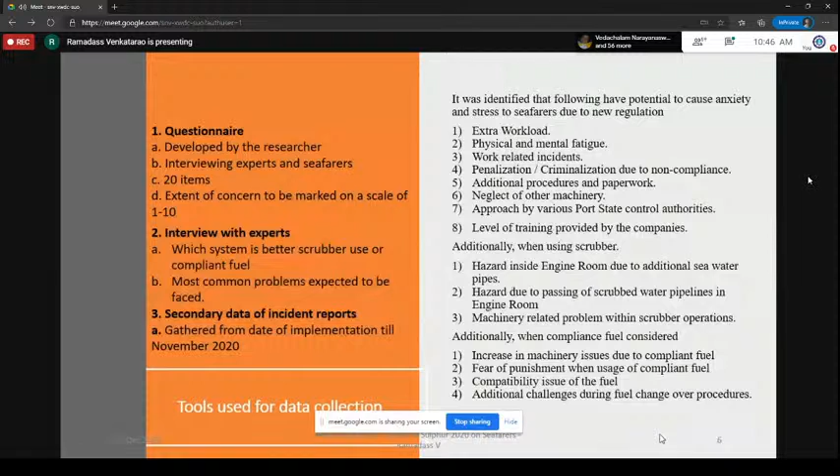Questions were made with a lot of concerns that had been identified, and there were about 11 concerns on the use of scrubbers and 12 questions on the use of alternate fuel. A statistical analysis was done, with descriptive mean, SD, and rank ordering.

The scrubber-related issues scored a high mean of 6.78, and compliant fuel use got a mean of 5.14. The mean scores above 6.6 were highlighted in the next table, which I am presenting on the next slide.

The significance level between the groups was also analyzed. If you see the concerns that have been listed, this is common for both scrubber as well as compliant fuel. Mostly the 6.6 and above score is seen only on the scrubber usage, and I could see at least more than 4 or 5 are identified by all categories, in many of these concerns that have been marked.

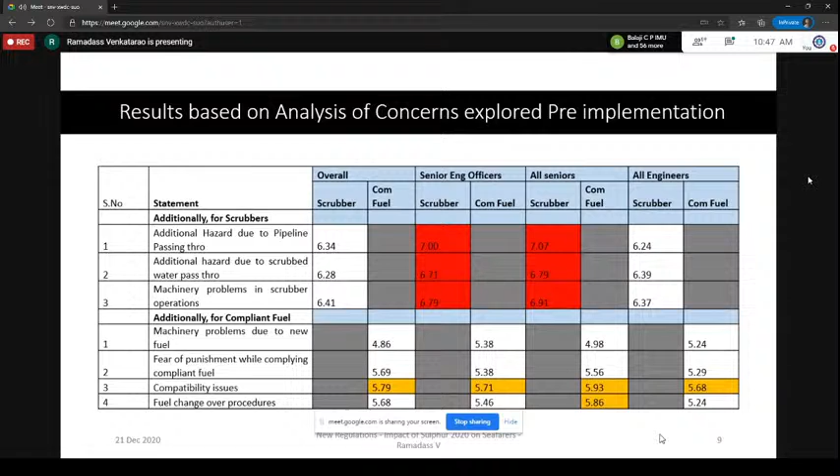You can see that the first set of points are those which would be happening only on the scrubber, where everything was high across the team, and the next set of 4 questions were for the compliant fuel, which were relatively lesser compared to the scrubbers.

From 1st January 2020 until 15th November, out of 221 vessels across 3 companies, we identified 59 ships fitted with scrubbers and 162 ships using compliant fuel. A total of 45 issues were reported, of which 34 were scrubber related and 11 were compliant fuel related.

The malfunction of the scrubber equipment happened to be 21 numbers, and the leakage from the scrubbed water system was 6. Leakage from the seawater system was 4. The possible penalization is 1, and the work-related incident was 2.

In fact, I must tell you that there was something which was not identified in the initial risk assessment that cropped in - especially there was a minor fire in the yard when the scrubber installation was being made, and even that I have made it a concern.

Of the 162 vessels where compliant fuels were used, 11 incidents were reported, of which 3 were pertaining to fuel compatibility, 6 were issues on machinery, and 2 were work-related incidences. The cleaning of the tanks with the high sulfur fuel posed a big challenge, as the ship's crew were not familiar with handling such a large quantity of sludge and discharging it.

In fact, in an incident while landing the sludge using some specific containment boxes, a minor spill also occurred on the jetty. So this is also one of the concerns that we found out.

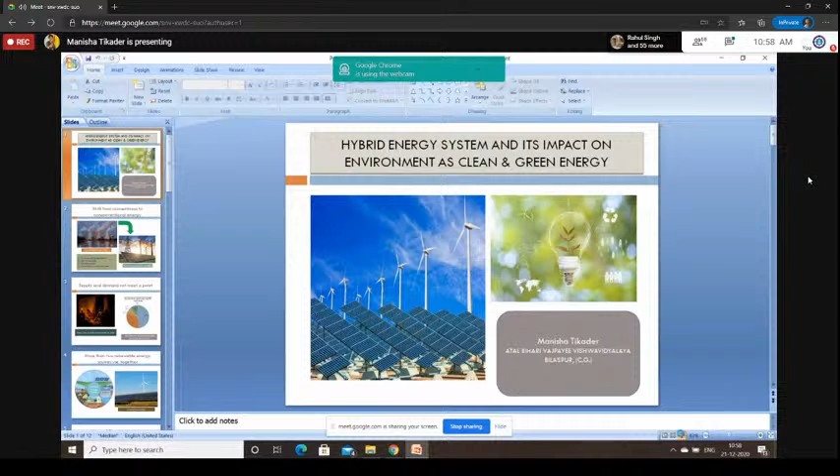Good morning to all. This is Manisha Tikader from Kolkata. I'm a research scholar from Atal Bihari Vajpayee University, Bilaspur, Chhattisgarh. This is my first paper actually, so I am very nervous. My topic is hybrid energy system and its impact on environment as clean and green energy.

This is my first slide. The whole world has been rapidly shifting to renewable energy over the last few years due to environmental degradation. A lot of heat is injected into the biosphere from thermal power plants through exhaust gases and wastewater. The major problem is the effect of discharge of large quantities of heated wastewater into natural water basins. Hot water and greenhouse gases raise the temperature and disturb the natural ecological balance and human health. The plan is to have at least 175,000 megawatts of installed renewable energy capacity by 2022.

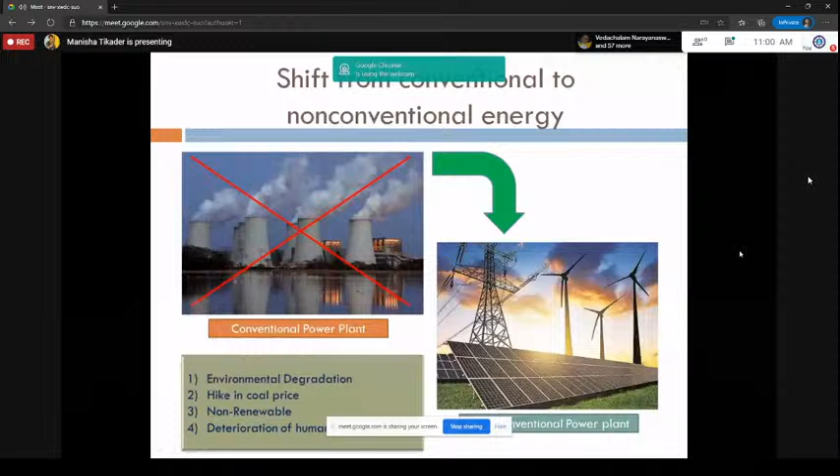But till now, millions of Indians are not connected to the grid system. Some parts of India remain dark at night. According to the data of the Central Electricity Authority, in the year 2019 India generated 126,759.09 megawatts of non-conventional energy. Some of the world's biggest solar and wind power projects are now being built in India.

At the same time, India has a very high population, so it has to optimize land usage. Therefore, we plan a system that uses both solar and wind power in a single location. India's first large-scale solar-wind hybrid energy project has been built in Karnataka at Kavithal, Raichur district. Hybrid power projects will end up providing a measured and optimized way to generate renewable energy, which helps make our planet green and clean.

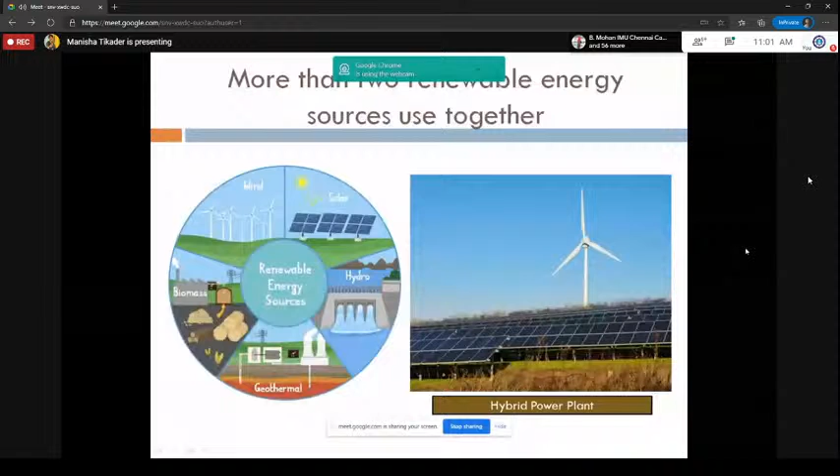Now, the question is, what is a hybrid energy system? It is when two or more than two renewable energy sources are used together to provide increased system efficiency as well as balancing energy supply and environment. The main objectives to switch over from conventional to non-conventional hybrid power systems are: one, making the Earth's environment suitable for human habitat to meet the increasing demand of power; optimum utilization of land; and improving the economy.

The word solar means the sun, and solar energy means the energy of the sun. Each and every day, the Earth receives a huge amount of energy directly from the sun. Using a specific method, we can utilize solar energy. Solar energy reaches the Earth in the form of sunlight. On a sunny day, at noon, Earth receives 1 kilowatt per meter square of energy.

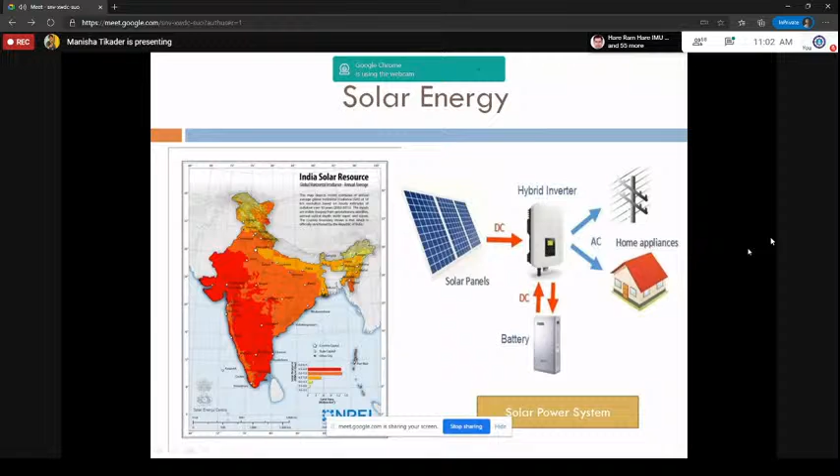India has a huge potential for solar power generation. In this map, we can see the western part of India receives a good amount of solar radiation. India's goal is to produce 100 gigawatts of solar electricity in the year 2022. A solar panel works by allowing photons to free electrons from the atoms, generating a flow of electricity.

We first noticed that King Hammurabi set up windmills to improve irrigation in agriculture in the 17th century of Babylonian civilization. Wind power mills produce electricity with the help of wind to provide mechanical power through wind turbines to turn electric generators. The main parts of the wind turbines are rotor blade, brake, gearbox, controller, etc.

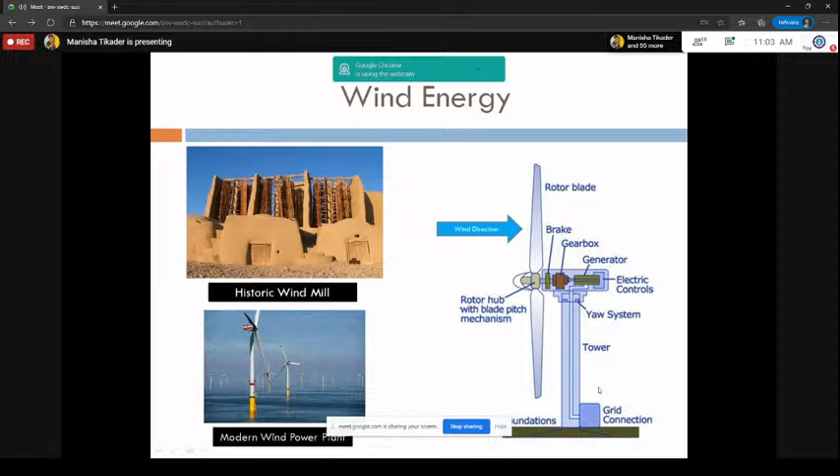The most important component used in the hybrid power system is the inverter. The role of the hybrid inverter is very important to convert direct current DC into alternating current AC. There are different types of modes of hybrid inverter.

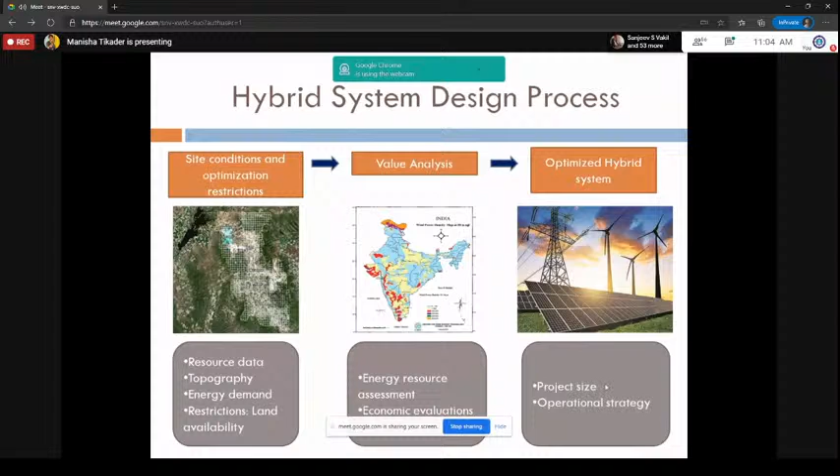Now, the advantages of the hybrid energy system. Some hybrid systems typically include both, which can simultaneously improve the quality and availability of power. There are limited operations and low maintenance cost. The hybrid energy system does not use any fossil fuel. It is exclusively a renewable energy system.

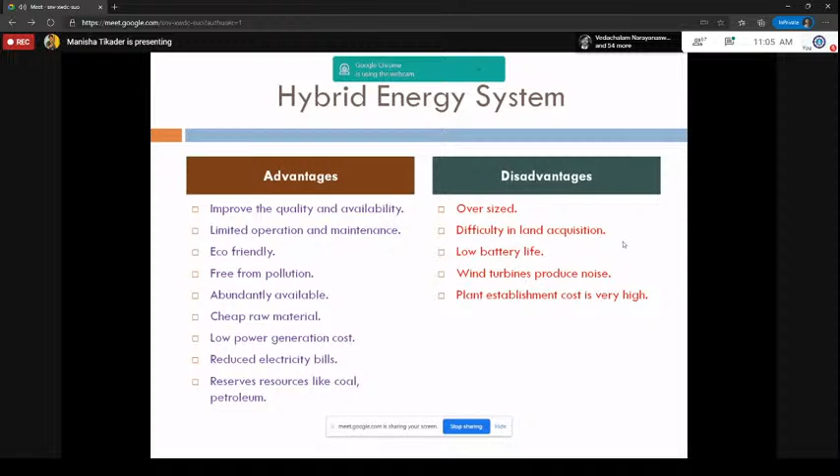Disadvantages are: in most cases the hybrid energy system is oversized. 1.3 billion population in India have to install this kind of hybrid power system. It is very difficult to find the site because land acquisition is a big problem in India. Still now, 90% of energy is supplied by conventional sources. So there are a number of environmental issues: emission of carbon dioxide, sulfur dioxide, nitrogen dioxide, and particulate matter causes adverse effects on the environment and causes climate change.

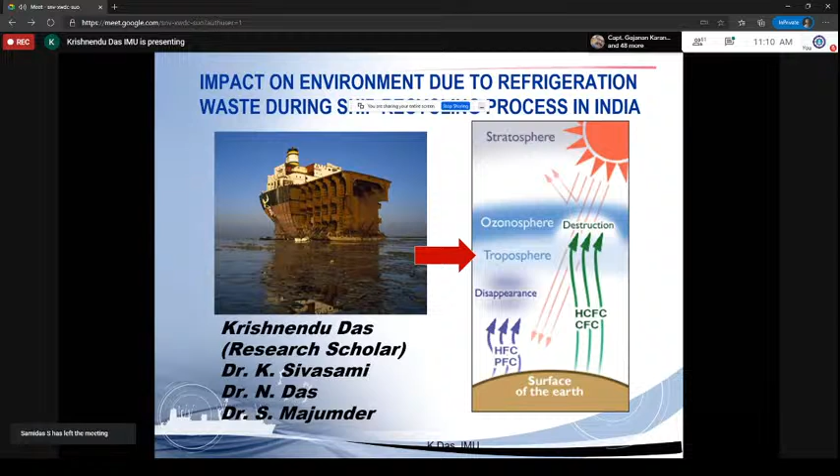So what actually happens when you go for ship breaking? If I talk about the concern in India, it is one of the biggest industries because of the ship recycling process. There are so many small and big ship recycling industries throughout the coast of India, near about 150, whether big or small. When you look at ship breaking industries, first you will find Alang in Gujarat, then Maharashtra, meaning Mumbai, Dharukhana, then Calcutta, Khidirpur, then Andhra Pradesh, Vedaravu, near Kakinada, Kupala, so many ship breaking industries are there. In total, the world's ship breaking industry, around 33% or more happens in India. This industry has a chain relation with other industries for recycling steel and other commodities coming out after the breaking process.

So here, in this magazine, you can find so many things, where in India you can find out around 33% of the scrapping happening. If you look at this report, in 2015 there were 275 ships, 2016, 249 like this, and in 2020, up to the third quarter, 129 ships already in process and done, even with COVID-19 situations. Then we can see what figures are going on in the ship recycling process and what the effect actually is.

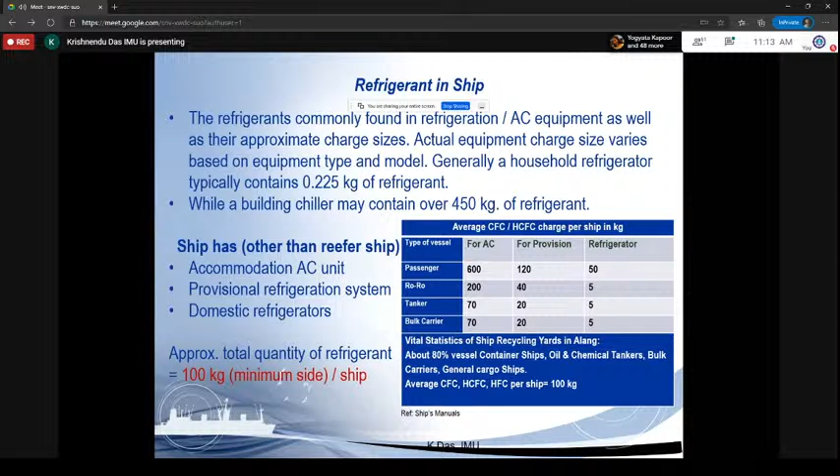So if I go for the average, considering the lower side, every ship has at least 100 kg of refrigerant used, on ships that are 25, 30, or 35 years old, where as per the Montreal Protocol convention, we know that at that time HCFC and CFC refrigerants were used, mainly R12 and R22. So now, with the Montreal Protocol, you can find that it phases out all these, sorry, reduces these. So with refrigerant regulation plus the Montreal Protocol, now we are moving toward higher, more environment-friendly refrigerants.

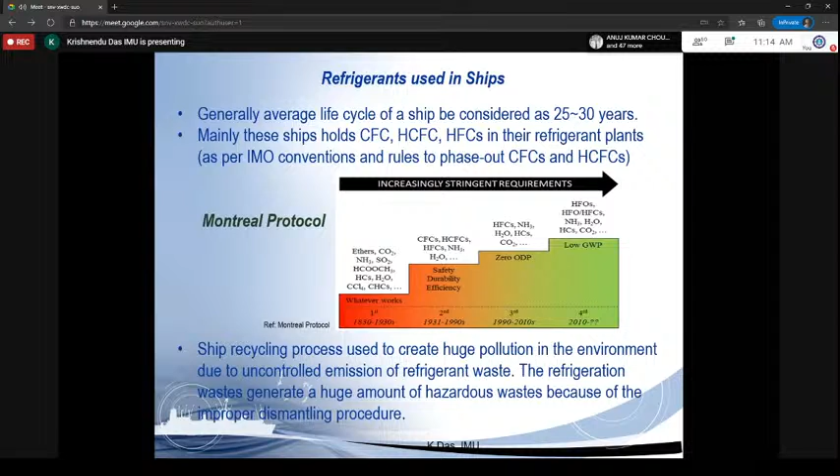If you go back to 1931 through 1990, you will find CFC and HCFC were used, which are fluorine and chlorine based. So what is the pollution actually coming from this? You will find out.

India entered the Hong Kong Convention in November 2020. The Hong Kong Convention says how you categorically control and audit the recycling process and all the commodities coming out.

Which go for environmental effects. So if I go for that, you will find out what is actually happening. There is no collection record of refrigerant from the ships, no release record of ships when they are breaking these refrigerant units, pipelines, all these. No record of in-house disposal using a special type of incinerator.

Remember, R12 and R22 cannot be used anymore. But somewhere we have gone through some shipyards and found records that refrigerant has been recovered. But after that, what happens to the refrigerant? Because it cannot be used, and frankly speaking, there is no such disposal facility for any shipyard in India.

Then that system is open loop. In the Hong Kong Convention, nothing is mentioned about what to do in this open loop system. They simply release refrigerant directly to the environment, whether it is breaking 50%, 20%, 25%, or even 10% release of refrigerant, because we are thinking when they are breaking these, the people are not trained.

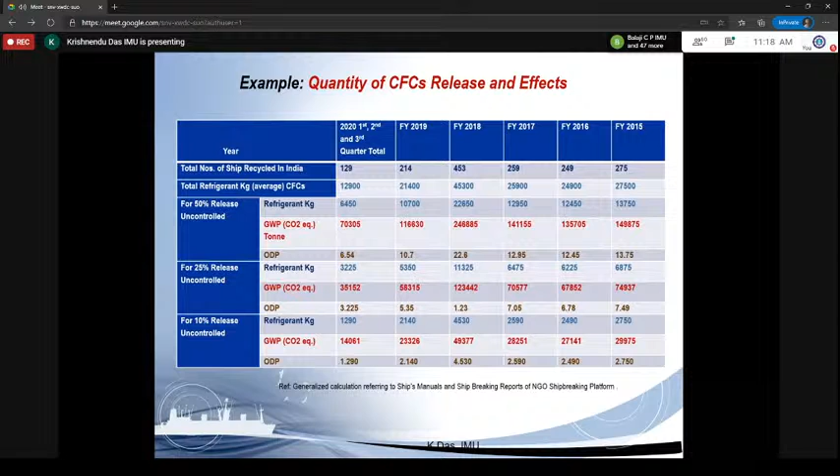This is our scenario. I am not going for the back side. The calculation is very simple, and this calculation is on the lower side. I am not considering any passenger ship here. So this is the scenario of CFC released, which is coming up every year from the recycling process in India.

Environmental effect, I will not discuss too much. Chlorine, chlorofluorocarbon - chlorine is there. When these CFCs and HCFCs are at the surface level, there is no effect. But when it goes to the stratosphere, then it has a bad effect on the ozone layer. This chlorine affects the ozone, breaks the ozone, and there is a hole. That is the idea of this ozone breaking process, which everybody knows.

So just think about it - one chlorine molecule breaks about 100,000 ozone molecules, and that is happening every year in our ship breaking industry. That calculation already given is the minimum side. What is the effect? All of us know very easily: sunburn, skin cancer, cataracts, and other skin and eye damage - obviously direct and indirect effects, aimed towards the smiling globe.

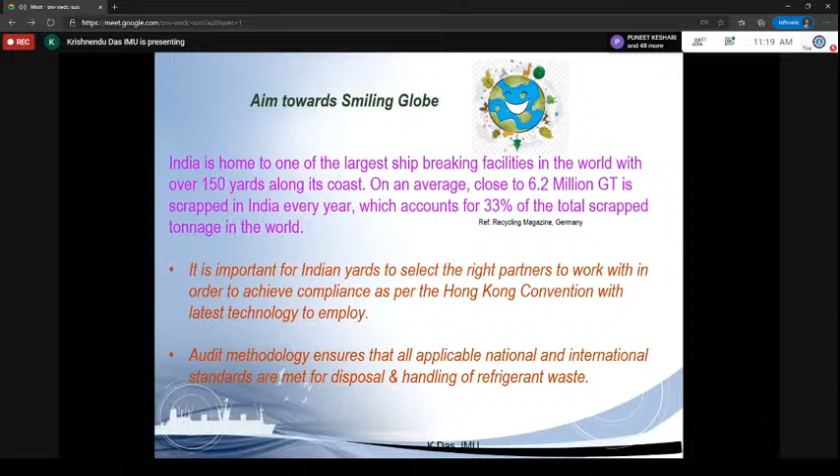So I have already told you about so many ship recycling yards, small and big, along our coast, which is 33% of the total scrapped tonnage. It is important for India to select the right partner to work with in this order. That means we have to work properly with the industry where our CFC and HCFC disposal unit must be in cooperation. Audit, at every point we have to do audit, and on the next page I'll explain what to do for our research and the handling process.

Disposal procedure — now this is where our convention does not mention the detailed disposal procedure for about 20-year-old ships which used CFC and HCFC. No risk assessment related, and then refrigerant goes to a reclaimer — but what is the use after that? That is the open question: is it open loop or closed loop? Because if it is closed loop, it has to be destroyed or disposed of properly.

An environment awareness training program for workers and staff must be required. That is also very lacking, as we saw during our visit. We have seen that nobody knows about what the actual effect is — even some management level officers, I'm not blaming them, because this is the actual fact.

They don't bother about it either. Even for the convention, they are just doing a paper convention — that is only for the audit, showing how much they are collecting. What is actually there for disposal — no records, nothing, no process is there.

Training is required to have a certified person for monitoring, record keeping, and disposal of refrigerant from ship recycling — even if it is received by the industry or source industry, how it is used, whether it is disposed of properly or just used for other machinery. There is no record, nothing is there, so the loop is still open. That means all this refrigerant, directly or indirectly, is released to the environment.

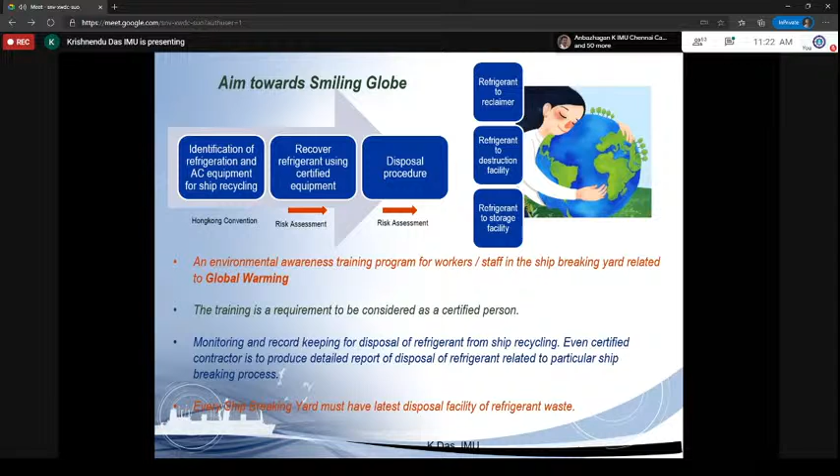There are three very effective processes for disposal: incinerator or high temperature incinerator, or a plasma plant with an arc system where a 10,000 degree temperature is maintained, breaking down the CFCs and HCFCs, separating all the molecules to be used as raw material so they are not released into the atmosphere. That too should be installed everywhere.

That is my target, and we have to do this work all together. This is my reference — it is hard work, but we have to work from the heart. That is my presentation and research topic for today.

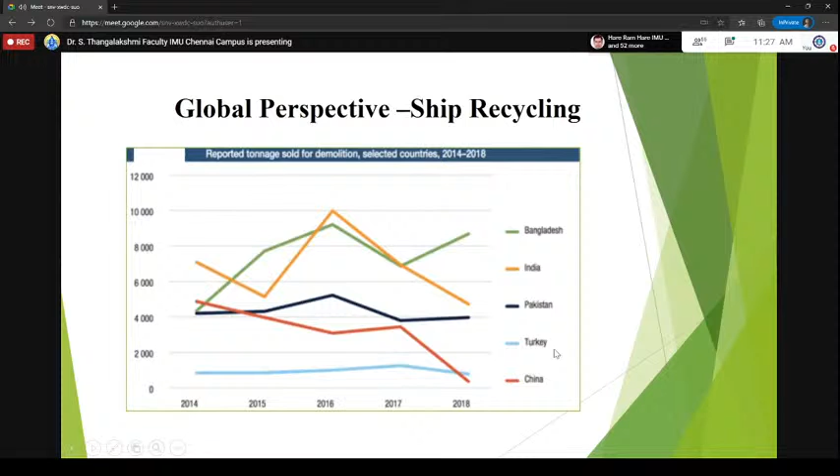Next slide, please. So these are the major legal frameworks: the Basel Convention on the Control of Transboundary Movements of Hazardous Waste and their Disposal of 1989, the ILO guidelines which specify living and working conditions in the ship recycling industries, the Hong Kong International Convention for the Safe and Environmentally Sound Recycling of Ships 2009, and the EU SRR, that is European Union Ship Recycling Regulations, enacted in 2013.

So the entry criteria for the Hong Kong Convention requires 3 separate criteria. The first is ratification by 15 states, the second is that member states must represent 40% of the world merchant shipping tonnage by gross tonnage, and the third is that the combined maximum annual ship recycling volume should not be less than 3% of the combined gross tonnage.

At present, the status is that the first criteria has already been met. The second and third criteria are yet to be met.

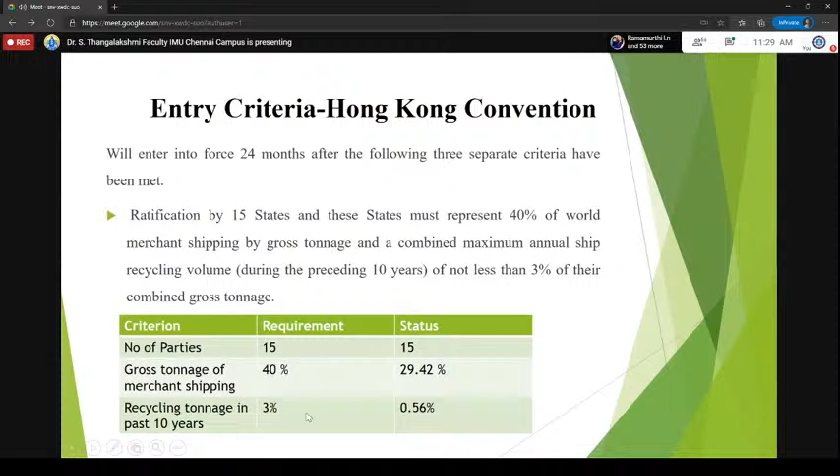So the timeline of EUSRR is that by 31st December 2018, all new ships of 500 GT and above flying the flag of EU and EEA shall carry an inventory of hazardous materials on board. And ships which are to be recycled during that period must have a ready-for-recycling certificate, and must be recycled only in EU yards, from the list of EU ship recycling yards.

The next mandatory timeline, which is quite close to us, is 31st December 2020. Ships flying the flag of EU and EEA, and third-party ships visiting EU and EEA ports and anchorages, shall have a valid and certified IHM on board. At present, many of the flags are issuing SOC in this regard.

Next slide. So from the Indian perspective, India has acceded to the Hong Kong Convention and is home to the largest shipbreaking facilities in the world, over 200 yards along its coast. Along the Alang-Sosiya Belt, which accounts for nearly 95% of India's ship recycling, about 6.2 million GT is scrapped in India every year, which accounts for about 33% of the total scrap tonnage in the world.

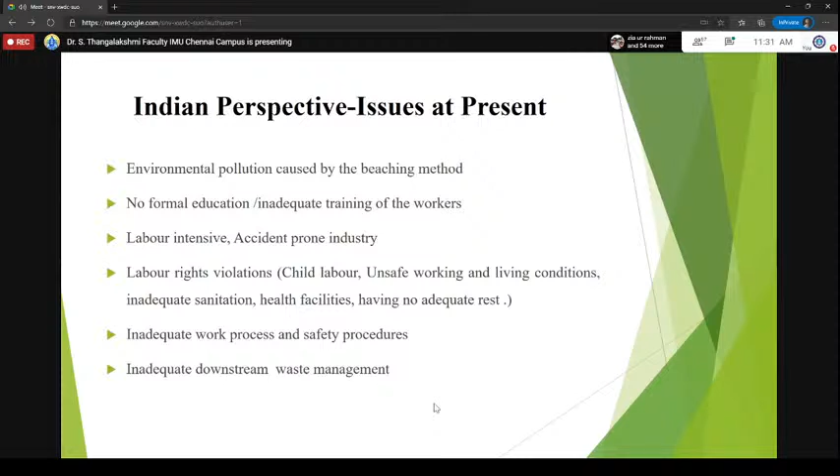Next slide, please. So the issues at present in the Indian shipyards are the environmental pollution caused by the beaching method, which is not acceptable for EU SRR, and no formal education or adequate training for the workers, leading to labor rights violations. It's a labor-intensive industry with inadequate work processes and safety procedures, and inadequate downstream waste management, which is also a point of concern as far as EU SRR is concerned.

So presently, about 43 yards are in the European list of approved yards, including 34 facilities located in 12 EU member states and in Norway, 8 facilities in Turkey, and 1 facility in the United States of America. It's quite sad to note, and a point of concern, that not even a single yard from India has qualified to be in the EU approved ship recycling yard list. So that is a matter of concern as of now.

So the mounting pressure from NGOs and financial institutions is forcing EU ship owners to follow a responsible approach towards ship recycling. The European Union Ship Recycling Regulation mandates that EU flagged ships must be recycled only in the EU list of approved yards. Right now, many European ship owners are circumventing the regulations and sending vessels to India for demolition by choosing flags of convenience. The EU has noticed this and is trying to provide incentive schemes for ship owners who opt to recycle at EU approved yards. If the Hong Kong Convention doesn't come into force immediately, this could increase acceptance of EU SRR by ship owners, meaning a huge loss of business opportunity for India, which recycles almost 40% of world ship tonnage.

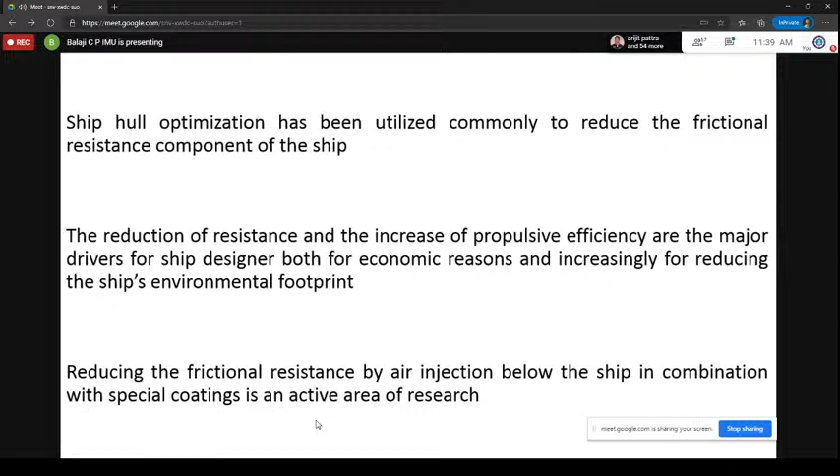This air lubrication method is a technology to reduce hull friction resistance by sending air to the bottom of the hull, which creates a layer of air bubbles between the hull and the seawater. There is a formation of air bubbles between the hull and the seawater. These air bubbles will reduce the frictional resistance of the hull.

This paper reviews various techniques by which air bubbles are created and sent below the hull. They are air micro bubbles, air cavity, and air film or layer formation. First, air bubbles or micro bubbles; second, air cavity; and third, air film layer formation.

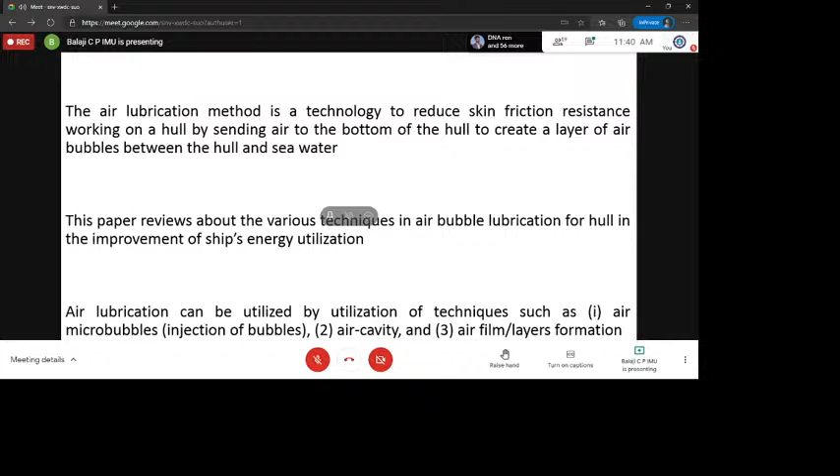In air micro bubbles, we have two methods. Presently, they are doing research on small vessels, not on big vessels.

In air micro bubbles, we have creating micro bubbles using a hydrofoil air pump. By this method, micro bubbles are generated using a bubble generator, that is the hydrofoil air pump, and they are sent underneath the hull to form a layer which will reduce the frictional resistance. But in this method, there is a need for production energy required for producing the air bubbles. We require conventional bubble generators which require energy.

So next, they came out with another method which, without using energy or bubble generators, can produce the same micro bubbles, smaller bubbles. This is called winged air induction pipe technology. This technology has an angled hydrofoil with an air introducer, with a winged hydrofoil.

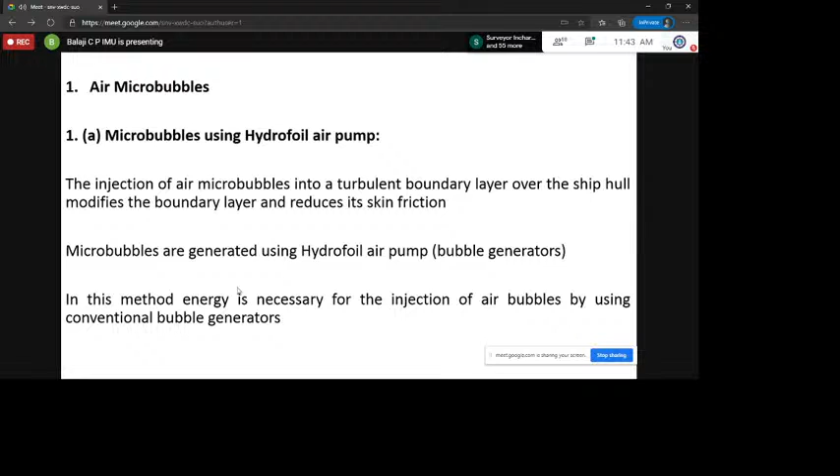Compared to the previous hydrofoil air pump method, this micro bubble size is almost 1/100th the size. They have found that once these air bubbles are ejected, the size of the micro bubbles doesn't change. That is one important thing.

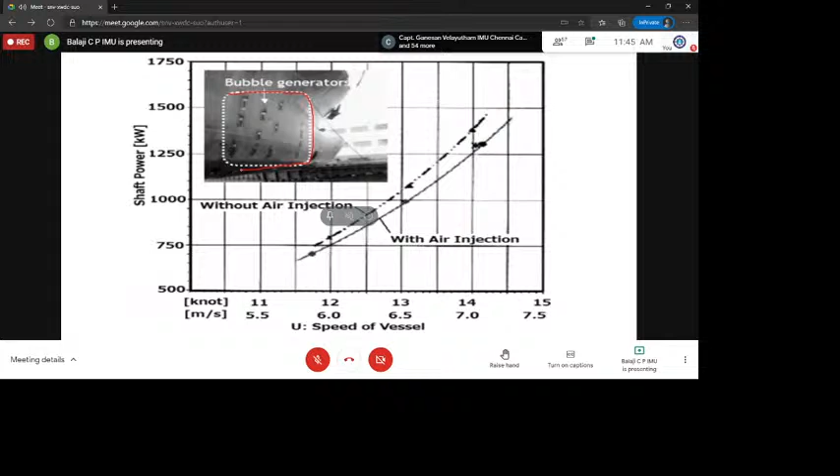This is about the bubble generator, or winged air induction pipe technology method. There is a graph drawn with shaft power on the y-axis and speed of the vessel on the x-axis. They have done experiments increasing the speed and measuring the shaft power required, one with air injection and one without fitting of air injection.

We can see that with air injection, more speed is achieved with less power. In case of no air injection, the same ship used for the experiment before requires more shaft power for more speed. That means more fuel, more fuel burned means more cost as well as more emissions and pollution to the environment.

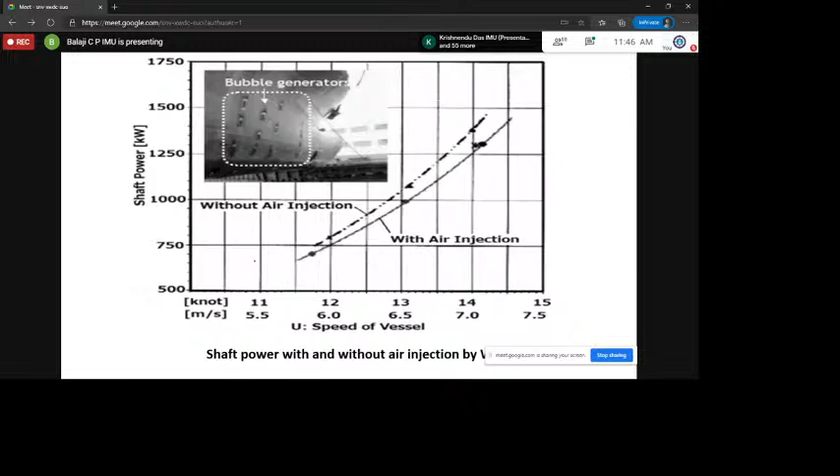This is the second method, about air cavity. In this, air is discharged from the blow-off portion mounted on the bottom of the hull, and this air discharge converts into air bubbles due to the tearing forces of the surrounding flows.

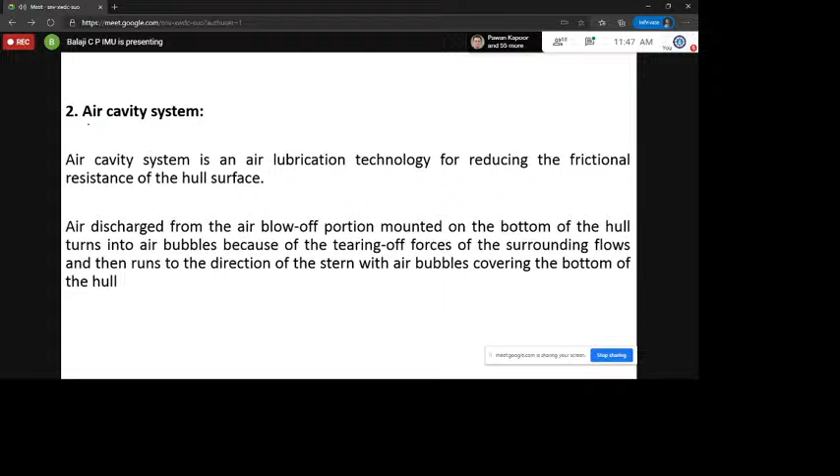All these experimental things have been done on small ships, and this will reduce the frictional resistance. But when doing the experiment, they found there is a difficulty in maintaining the stability of the air film formed.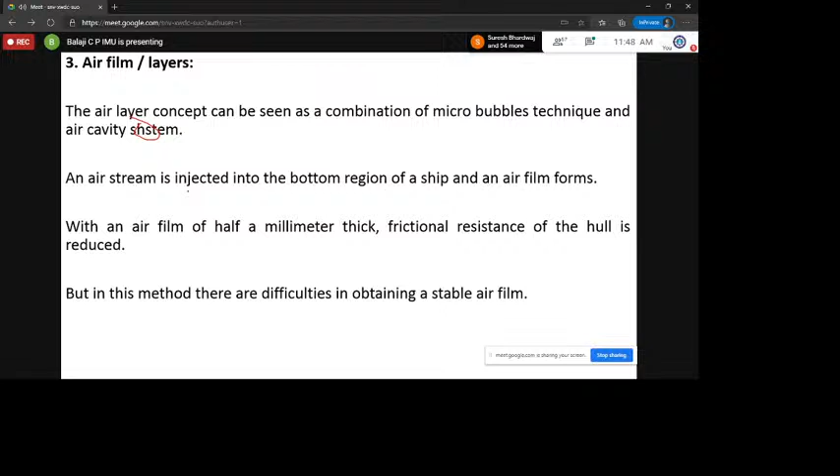So the conclusion is we have to go further and do some research on these types of things, which will add to the reduction of frictional resistance of the hull, thereby reducing fuel consumption.

Thank you. Thank you, Mr. Balaji. Thank you so much. Any questions on this? Yes, sir, there are questions.

Which technology has the potential to be implemented in the near future? What hinders its implementation in real time now?

Is the question clear, Mr. Balaji? Yes, I got it.

Actually, the winged air induction pipe method can be used because it doesn't use any energy for production, but the ship's speed is very important now, and where to fix all these things, because there is the ballast condition and the loaded condition. The difference between ballast condition and loaded condition changes the ship's water line, and then another factor is the speed of the ship.

Nowadays, due to slow steaming, we are going to reduce speed. So first they started with normal speeds, and now slow speed has also been introduced. So there is an area of space for research in these things.

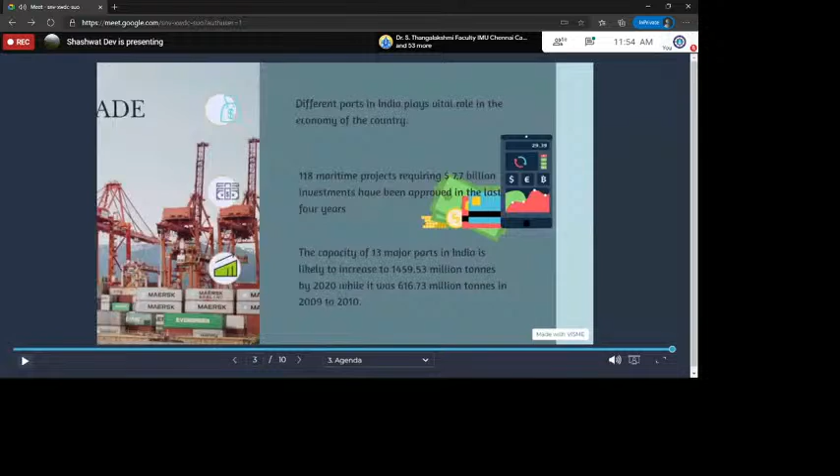Traffic management in ports help in improving the efficiency of port security. The global traffic at port is increasing every year. Countries like China, Singapore, South Korea, United States, etc. are among the top world container ports. Handling millions of TEU traffic per year also increases the amount of global money that is at stake.

Based on a study conducted by the Allianz in 2018, 75 to 96% of maritime related accidents are caused due to human error, such as inadequate training, fatigue, negligence, etc. These oversights have cost around $1.6 billion in losses from 2011 to 2018.

Computerized port management can reduce these losses to a great degree. Automation of activities that are otherwise handled manually can increase the efficiency and reduce risk to the port. The ever-growing traffic needs to be managed by an ever-evolving port management system.

When we are looking into the finances that are at stake for any port-related activities, we should also consider the losses that companies or respective stakeholder would incur in case of an attack or a calamity.

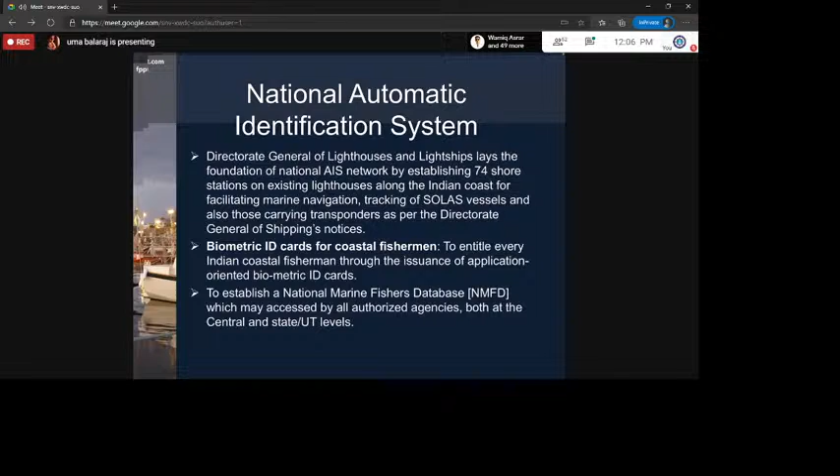Then coming to the National Automatic Identification System, we have the Directorate General of Lighthouses and Lightships laying the foundation of the National AIS network by establishing 74 stations on existing lighthouses along the Indian coast. We also have tracking of SOLAS vessels carrying transponders as per the Directorate General of Shipping notice.

And we have biometric cards for coastal fishermen to establish a national marine fishers database, which can be accessed by authorized agencies at both central and state union levels.

Coming to the Coastal Surveillance Network, it has been set up by the Indian Coast Guard comprising a sequence of static sensors having radars, automatic identification systems, day and night cameras, and met sensors at 46 locations along the coastline and islands.

The objective of vessel traffic services is achieved by integrating a variety of sensors like radar receivers, GPS, direction GPS, hydrological and meteorological sensors, which give an overall geographical picture to reinforce maritime domain awareness. The intention of the Coastal Surveillance Scheme is to strengthen the infrastructure of patrolling and surveillance of shallow areas across the coastal region.

And we have RFID tags, which offer visibility of real-time cargo movement. We can track a cargo container vessel, whether it is berthed, in anchorage, or whether the container has moved to the CFS. We can check it very easily.

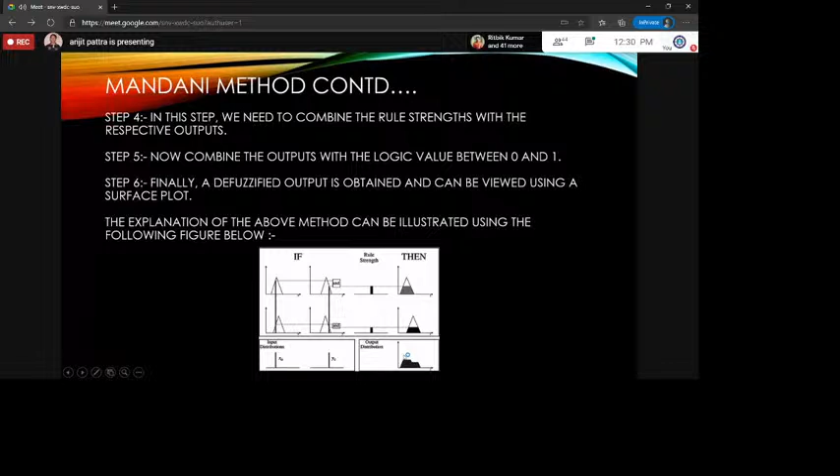So the fuzzy controller we are considering uses the same function as before, with the help of the PI integral controller. Now this fuzzy logic controller has as input the error input, which is the input minus the feedback, and the other one is the derivative of the error. Since we are using a multiplexer here, it is actually performing the summing purpose, so we can say it is a modified PI controller.

So we have considered here the block diagram for this: first is the error input, second is the derivative of the error, and this is the controller, and hence it leads to the excitation.

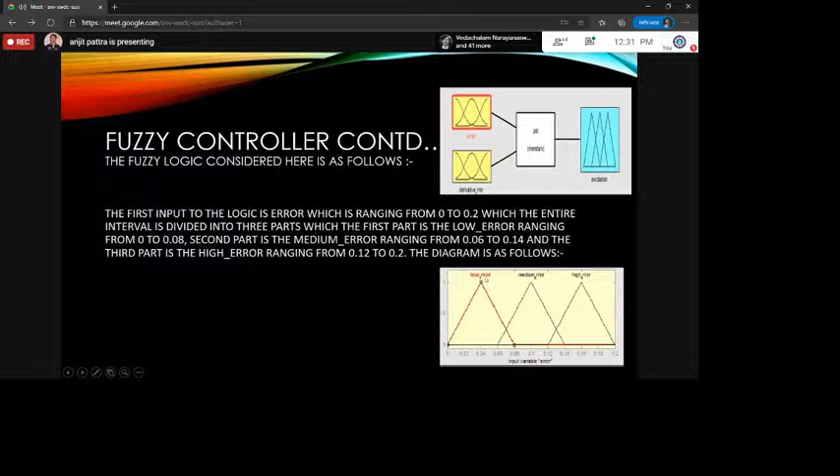For the best response, we have considered the input in between logic 0 to 0.2, divided into low error, medium error, and high error respectively. Similarly, the derivative of the error has been divided into 3 parts ranging from logic 0 to 0.8. Similarly, the excitation has also been divided into low, medium, and high, also ranging from 0 to 0.8. These values are obtained after performing various responses, and we obtain the base feedback for these values.

Now we have considered this rule strength where it is seen that the excitation is following the derivative of the error input. After performing all this, we obtain this type of surface plot, and if we see the output response, it has been seen that the overshoot is reduced and it steadily reaches steady state with less delay time, and hence the transient response is reduced, reaching its steady state within a very short interval of time.

Moving on to the conclusion, this fuzzy logic controller can very much replace the normal controllers used today, like the PID, PI, or PD controllers, as it helps reach the steady state with less transient time and less delay time, and it can be a good replacement and can be used in determining the dynamic response of a system. Thank you.

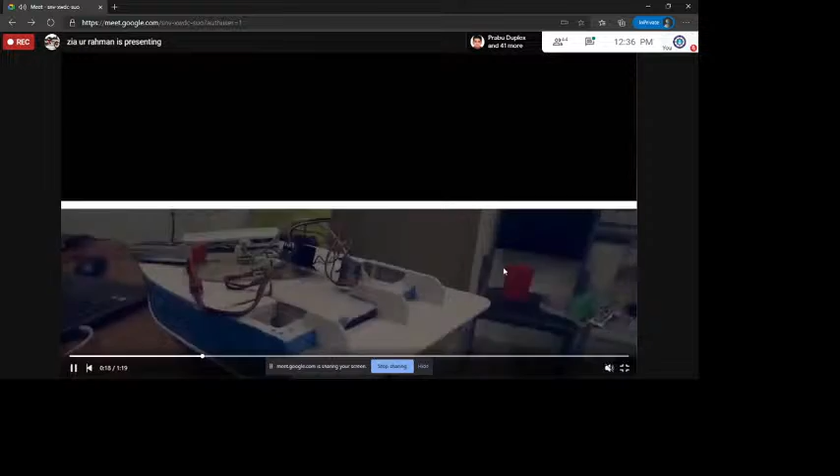We have implemented it on a twin screw boat using the ESP32 module. It is a Wi-Fi connectivity module that acts as an access point. Initially, when we configure it, it connects to the Wi-Fi and gives us the ability to talk to the device over the internet, giving us the ability to exercise control from almost anywhere in the world just by connecting to an internet connection.

Here we can see the manual control using a laptop interface. We have also implemented it using Google Assistant, providing voice control ability. Here we see ahead, astern, port, and starboard actions being carried out at maximum RPM. The left side of the computer screen is the RPM slider. We have implemented it using the Adafruit IO platform, a cloud database platform available for IoT implementation, which gives us speed and direction control.

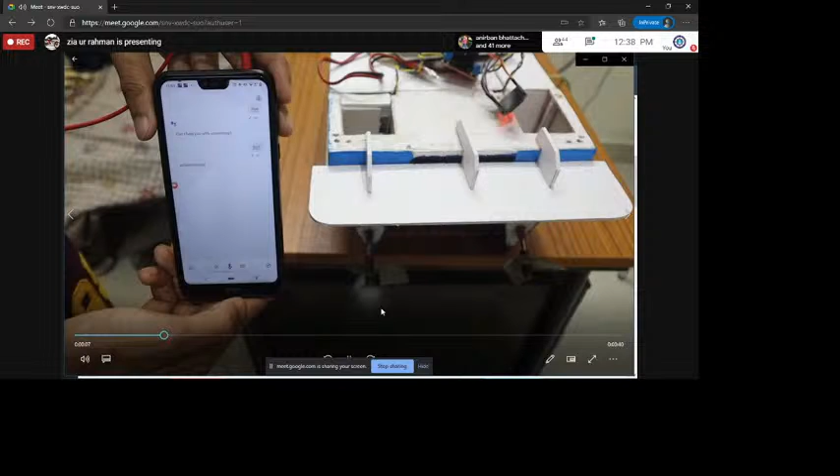Now I would like to present the video demonstrating the voice control. Here we see the voice command being given to Google Assistant, and the response time is roughly around a couple of seconds at times, but most of the time it is quite fast once the AI gets trained properly for receiving specific commands. It also has voice recognition so that other voice interferences are eliminated, provided by Google itself.

This is a very preliminary model describing how we can use IoT in the maritime field. We also have a lot of different implementations of this. Recently, during this COVID quarantine time, we have improved the model by providing it with the ability to receive remote updates and remote Wi-Fi credentials.

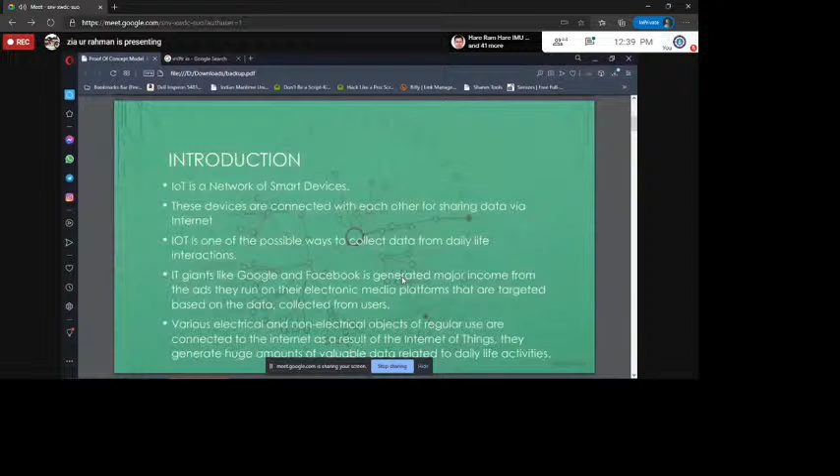Further, we are working on a new protocol called ESP-NOW protocol, which enables us to create a mesh network of a lot of different access points in a ship, which will be talking to one single access point connected to the external internet. This will eliminate a lot of cabling in the ships, and provide very quick and fast, completely wireless communication that is almost instantaneous. We are right now working on it.

Also, the over-the-air update and over-the-air Wi-Fi credential update technology that we recently put into the R model is very fascinating. We can update all the modules connected to the internet without using any cable connection, just over the air.

When a command is initiated, a reset command, the Wi-Fi modules, the node ESP nodes, act as access points, providing us a hotspot to connect to, where we can connect our devices using WPA2 authentication. Then we can update the code, update the Wi-Fi credentials if they have changed, and put in security patches.

There are a lot of issues in these, according to the recent IoT issues and IEEE conferences on IoT. A lot of different issues with security are right now being taken up. As far as I understand, no device and no system connected to the internet is completely hack-proof. This IoT implementation will definitely require a lot of continuous monitoring and continuous offensive and defensive security measures to keep it safe from all sorts of external intrusions.

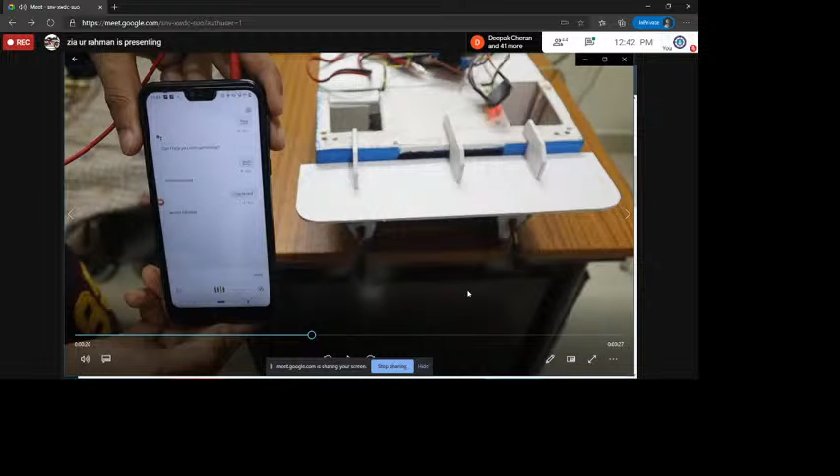Also, the state variables of the ships can have a lot of different fluid, mechanical, and thermodynamic processes going on. All the state variables can be very easily monitored and sent to a central SCADA system, which can be very helpful in further development. Also, this data logging can be used for machine learning, for implementing and training machine learning models, which are of very important value in the near future.

I would like to end my presentation. Thank you.

Thank you, Mr. Rahman. That's a very promising presentation. I'd like to hand over to Salam sir for any comment. Yes, sir. Yeah, so really a nice presentation, and it's a good effort made by you and your guide, Dr. U.S. Ramesh. Congrats.

And I have two questions for you. One, please sir. Have you ever looked into the possible latency, I mean the delay time, when it is really applied to commercial ships?

I haven't worked on the application of it onto real ships, but right now using a 2G network, I degraded the network to 2G speeds and tested it on various platforms. The best results I got were using Blynk and Tasmota applications. The response was almost instantaneous, whereas voice control is a little bit slow, but direct interface control using a device is excellent and instantaneous, sir.

Yes, whatever you are telling is applicable for coastal networks where 2G or 3G is readily available. But in the case of offshore, when it is powered by networks such as Inmarsat, response time is very important. So what I recommend is that you go to the General Electric website, the company GE website, and look at something called VISOR. In this, all the entire power and control systems in the ship are reported in real time to their GE control center, to the centralized control center. The control center can monitor, and they can modify any program and download or upload any program from their control station to any ship across the globe.

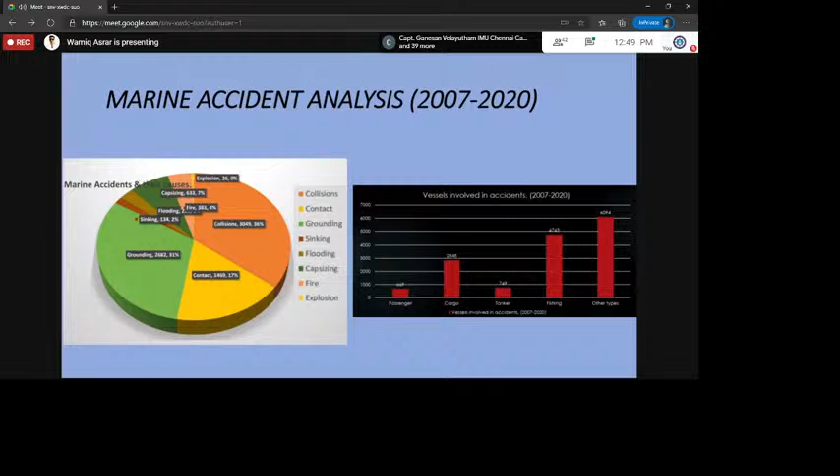So the question here is, what is the problem? On average, the length of a cargo ship is 200 to 300 meters and the average speed is 20 to 30 knots. The average time to bring such a ship to rest is about 25 to 30 minutes. This period is more than enough for ships to collide with other ships, the periphery of ports, or even icebergs. And here the major problem occurs.

To cater to the problems as stated above, all we need to do is focus on reducing the collisions and contact type accidents on cargo containers. So our idea revolves around this very point.

Let us look at the principle involved in the deceleration. When we look into the functioning of a ship, ships are brought to rest with the help of propellers and varying function of the engine. There are specifically two types of propellers: fixed pitch and controllable pitch. The primary aim of stopping any moving object is to increase the drag force experienced by the body. This can be done primarily in two ways: increasing the wetted surface area of the ship, or decreasing the magnitude or changing the direction of thrust on the ship.

So our idea focuses on executing it both ways. As a solution to the emergency deceleration problems, we give you the ECDS and EBP. ECDS, Emergency Cargo Drop Stop.

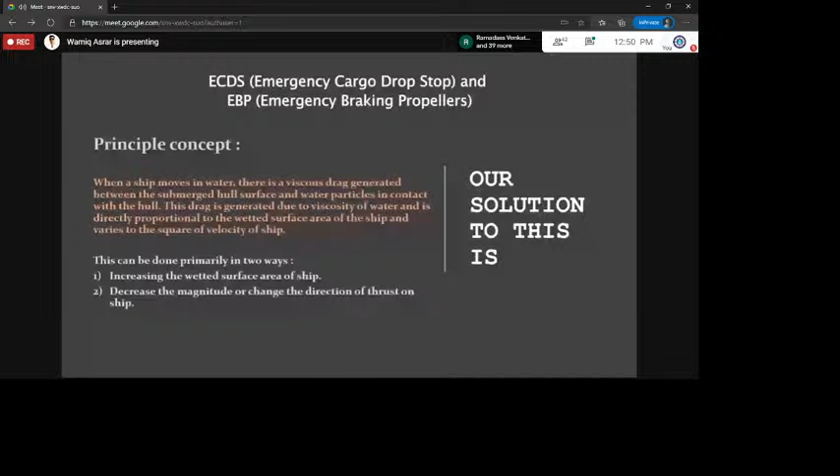This system suggests that some part of the cargoes on ship, likely 10 to 15%, be kept in specially designed boxes that would be ferromagnetic in nature and water repellent. The boxes would be kept on a sliding platform in the hold, hung with ropes operated on free fall or hydraulic power system. The boxes would be designed so that when hung, they would open into two halves, making a 45-degree angle between them. This would increase the exposed area, and when allowed to touch the seabed, if the length is approachable, could act as a pool type anchor.

This system also suggests the incorporation of a thick electromagnetic strip running across the hull below the waterline. The strip will activate when the ECDS containers are dropped off through strings or any rope into the seawater. Precisely, it will activate as soon as the ECDS system starts acting.

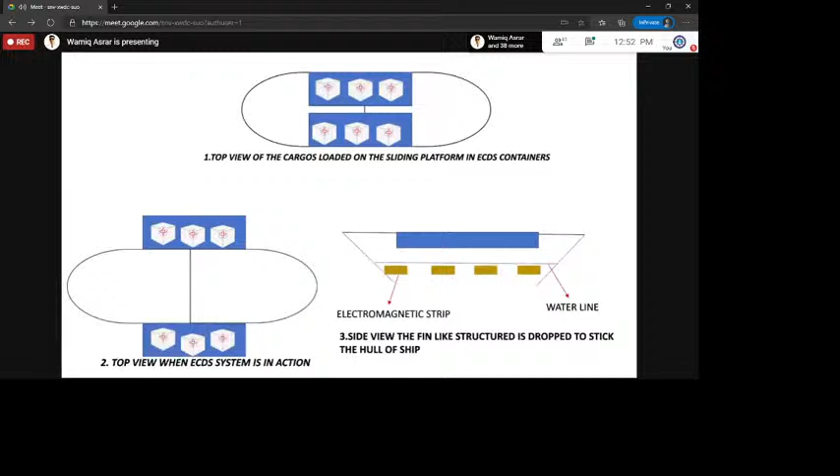When the situation suggests a condition of extreme urgency to decelerate the ship, the boxes with the platforms would slide outwards the hull, depicting fin-like structures, and the platform would then fall and stick to the hull, and the boxes would be dropped. As soon as the boxes are made to drop into the water, the electromagnets running across the hull will be activated, and the boxes would be made to stick to the electromagnetic strips.

The boxes would enhance the amount of area exposed to the water, exponentially adding up the drag force, ultimately increasing the resistive force. So when the ship is slowed as per the need, the electromagnets will be deactivated and the cargoes will be heaved up thereafter. The specially designed ECDS boxes can be dropped under free fall to the seabed when it is at an approachable distance, and thus can act as anchors.

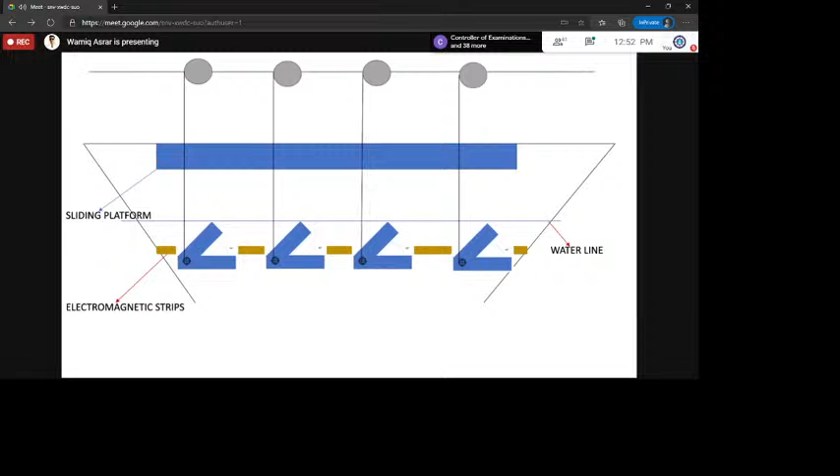This ECDS system would come into function with the help of a gearbox. Installation of this should be near the tail shaft of the propeller, as per our idea, which will be designed so that the translational motion of the platform with the ECDS container starts as soon as the propeller's RPM is set for lowering in the case of fixed pitch, or when the blades start orienting themselves in the parallel direction in case of controllable pitch.

Now Shorin will take over. Coming to our next idea, that is the EBP, emergency braking propellers.

The second part of the solution suggests installation of add-on propellers to the already existing propellers, but these propellers will be placed in the front region of the ship. These will completely fit into the ship's side walls, maintaining the streamlined shape of the ship, and will only come out when the EBP mechanism is initiated.

They will then drop into the sea to the level of the stern propeller and will start to operate in a direction so as to oppose the motion of the ship. This will increase the resistance offered to the ship's motion. The stern propeller's RPM will then be reduced and its direction reversed so that it reaches no thrust position.

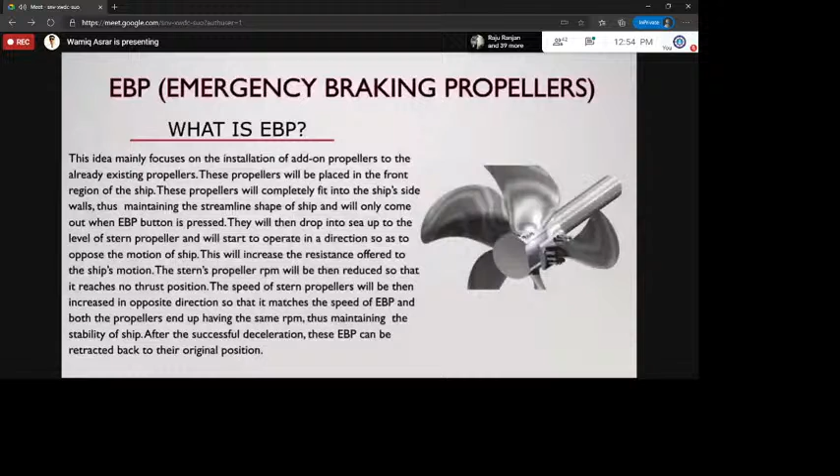The speed of the stern propeller will then be increased in the opposite direction so that it matches the speed of the EBP, and both propellers end up having the same RPM. Thus, the stability of the ship is maintained.

After successful deceleration, these EBP can be again retracted back to their original position. A ship's hull design will be altered to provide space for a compartment which can accommodate a propeller on each side, along with the hydraulic arm which will open up when EBP is initiated.

We are further deliberating upon the use of EBP as add-on propellers for steering ships in regions involving sharp turns. This will increase the overall maneuverability of the ship. We are also concentrating on the financial part of the entire project, putting efforts into making these designs as economical as possible.

The mechanism for the simultaneous use of ECDS and EBP, which offers the benefit of further reducing braking time, which can prove to be of immense importance when faced with crucial situations of life and death, is also a point of discussion.

So let's look at some of the advantages. First is avoid collision by fast deceleration. Second, these ideas, if implemented, can prove to be crucial in life-threatening situations. Reduce number of collisions, implying greater profits for the owners. Effective even in extreme weather conditions. Quick and effective braking system with low initiation times, and it also gives the option of using one braking method at a time or combining them according to the situation's demand. So that's all. Thank you.

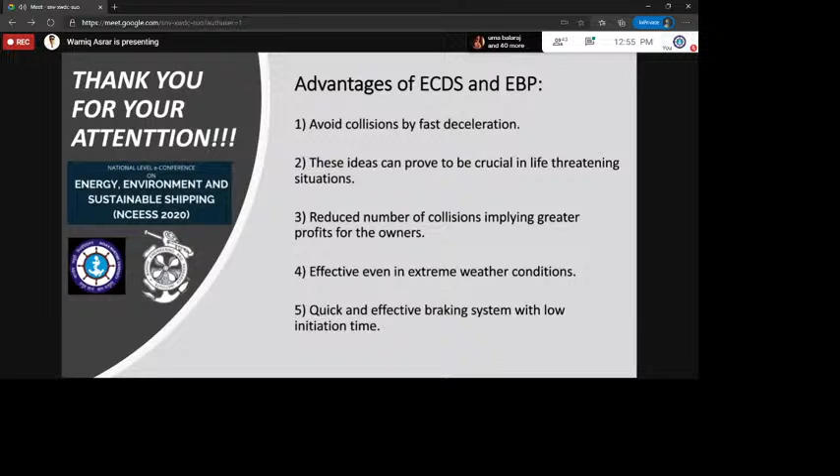Okay, Mr. Asrar and team, really it's a good presentation. Whatever ideas you have presented on both the ideas regarding the braking or decelerating the ship during an emergency is really nice and appreciable. I want to know, one question: whether this has been implemented in any ship, whether part of the idea or something like that?

No, sir. This whole idea has not yet been initiated or applied to any part of the ships as of now. And that's why we came up with this, because as we can see that braking is one of the major causes. The slow braking is one of the major causes which causes a lot of accidents.

Yes, fine. So as it being the first of its kind you are proposing, claiming, what I propose is that you check out the feasibility of the concept, because from the engineering, the concept is fine. Okay, so this is fine, engineering concept, and how far it is going to be applied in practice.

What I recommend you to do is a numerical model to estimate the wetted surface area requirements, in case of drop weights kind of thing, and in case of thrusters, propellers rotating in the reverse direction to contain the speed and to bring it to a halt, you estimate what are the speed requirements. Basically, you do a numerical modeling with ANSYS or something like that, and you come out with some numbers so that we can see the economic feasibility of implementation.

Second thing is that dropping these weights have impact on the stability of the ship. You also have an assessment on this one. The third thing is that you are talking about the electromagnets which are going to be on the bottom of the ship hull, and those weights, the systems which are dropped can be attracted, like that you are telling. You also estimate through modeling how much would be the energy requirement. For example, what is the power requirement for holding the weights? So like that you can estimate and you can come out with numbers so that you can compare different technologies and identify which is the feasible one.

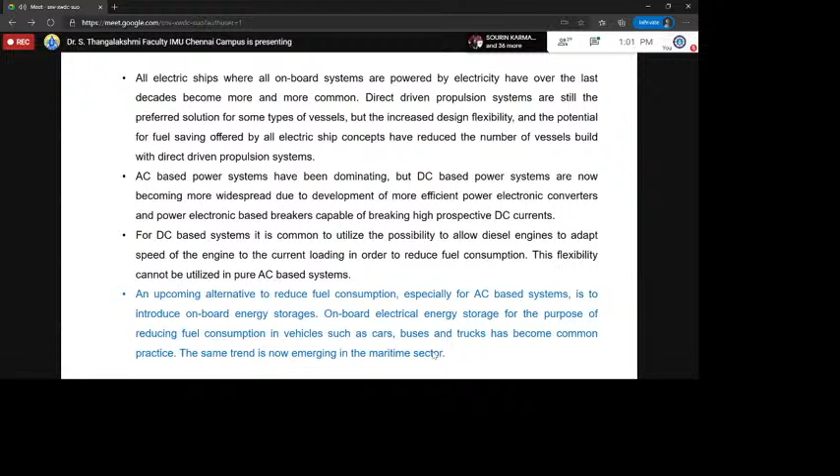New builds and retrofits are now being equipped with battery energy storage as a supplement to diesel generator sets. We can give some examples like plug-in vehicles, which charge in harbor, similar to ground-based plug-in hybrids. There are an increased number of vehicles or vessels sailing with batteries as the only power sourcing medium. So knowing about energy storage systems, especially with respect to the shipping industry, is very important.

When we talk about energy storage systems, it is not the only system used in the ship. We have parallel systems with which the ship is operating. But when we are managing the energy, it is managed by how effectively we manage the battery system. There are some issues still present in energy storage systems - the thermal transport and thermal management in batteries are very important issues, having direct impact on performance, safety, and reliability of the energy conversion and storage behavior. If these batteries are not kept within optimum operating limits, it will definitely impact performance.

For most batteries, the temperature should be kept within 30 degrees Celsius, probably ranging between 5 and 30 degrees Celsius. It is preferred if the temperature variation between cells in a pack is kept within 5 degrees Celsius. It is also known that battery life is curtailed if this temperature increases, say for example beyond 40 degrees Celsius. Similarly, extreme cold climates, like below freezing point, may limit the amount of current that can be drawn from the battery.

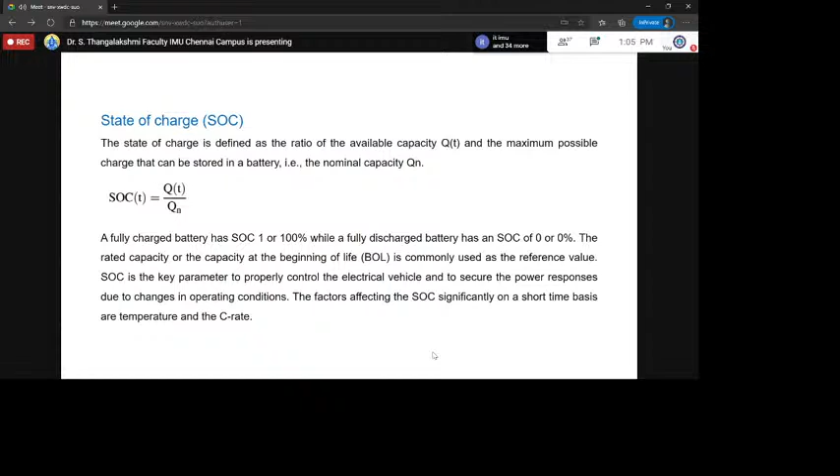The factors affecting SOC significantly on a short time basis are the temperature and C rate. C rate is another important parameter on which we validate the quality or performance of the battery. It is often expressed as C rate in order to normalize against battery capacity, which is very different between battery capacities - usually the battery rating is given in ampere hours. A C rate is a measure of the rate at which the battery is discharged relative to its maximum capacity.

For example, if we say 1 C rate, it refers to the discharge current which discharges the entire battery within 1 hour. If the capacity of the battery is rated at 100 ampere hours, then 1 C refers to a discharge current of 100 amperes.

Likewise, 5C refers to 500 amperes and 0.5 or 1/2 C refers to 50 amperes. However, there is no simple method available for accurately estimating the state of charge. It is related to the properties of the active electrode materials, and different active materials behave differently. Though we say a lithium battery, lithium has many combinations, so accordingly this would be differing.

For a lithium ion cell, 100% SOC refers to the state where all cyclable lithium ions are inserted only in the negative electrode material, and 0% equally refers to all the cyclable lithium deposited on only the positive electrode. So for cells based on lithium cobalt oxide, the amount of cyclable lithium is less than the total amount of lithium in the active material.

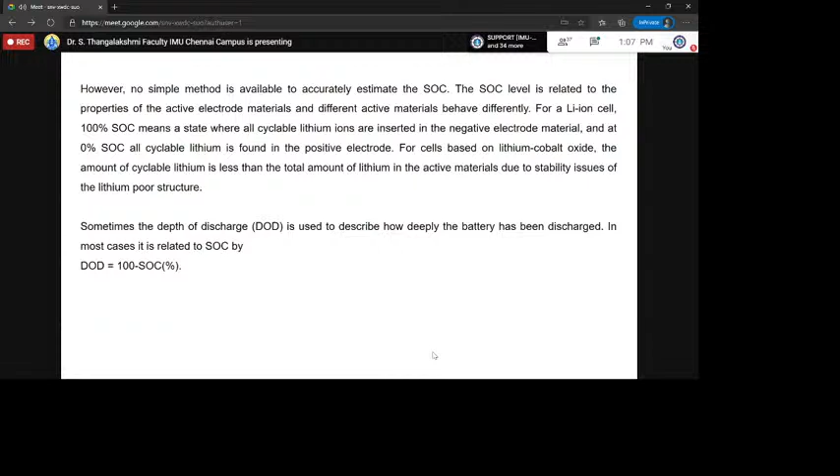Due to the stability issues of lithium structure, sometimes there is another variable given, which is the depth of discharge. It is used to describe how deeply the battery has been discharged. In most cases, this DOD is also related to SOC, and it is given by 100 minus SOC in percentage. Let us now see what is state of health.

The state of health is an indicator of remaining battery capacity compared to the capacity at BOL. The aging processes which lower the SOH start as soon as the cells are assembled. As the battery ages, the SOH will decrease until the battery can no longer fulfill the requested performance and end of life has been reached, meaning we have to maintain the battery life in order to maintain the performance of the entire propulsion.

So SOH is not a physical quantity, but it depends on parameters like number of charge discharge cycles, capacity and power fade, and internal resistance. The aging process of battery is complex and depends on the involved mechanism. The aging depends on the vehicle usage, battery and cell design. Temperature, SOC range, energy and power condition, and time are other essential parameters.

So why I am telling this is that we do have energy storage systems on vessels. For maintaining the energy storage system comfortably, for better performance of the entire propulsion, we need to know about these parameters. So the next thing which is affecting the battery performance and indirectly has an impact on the performance of the vessel is the temperature.

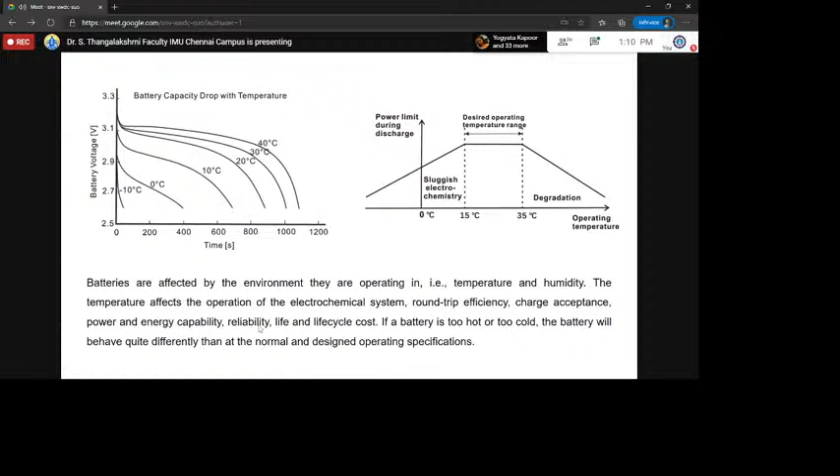So we do have maritime vessels coming in different sizes and structures, probably in different shapes. They may be built for short and long distance voyages, and they can be used for fundamentally different purposes, which will be changing criticality, right?

Because when a ship is moving from one place to other, it will be going through climatic changes, and accordingly the temperature variation will be there. As per that, we have to go for the battery management system.

The consequence is that there is a variety of power system topologies found on board maritime vessels. Some vessels carry large electric power plants with multiple diesel engine generators supplying onboard activities and multiple propellers and thrusters, while others are equipped with propulsion systems directly driven by diesel engines that at the same time power shaft generators to provide necessary onboard electrical power. So the variation in electric power demand is varying.

A vessel on a long distance voyage will usually have much more constant and predictable load demand than a dynamic positioning offshore supply vessel trying to stay at a fixed position, fighting against varying environmental forces from wind, current and waves. So when designing a ship with minimum travel time or covering only a minimum distance, these dynamic conditions will exist frequently. So these transient conditions should be taken care of to have a good battery life, which will impact the performance of the vessel. There are some papers researching on this energy management system.

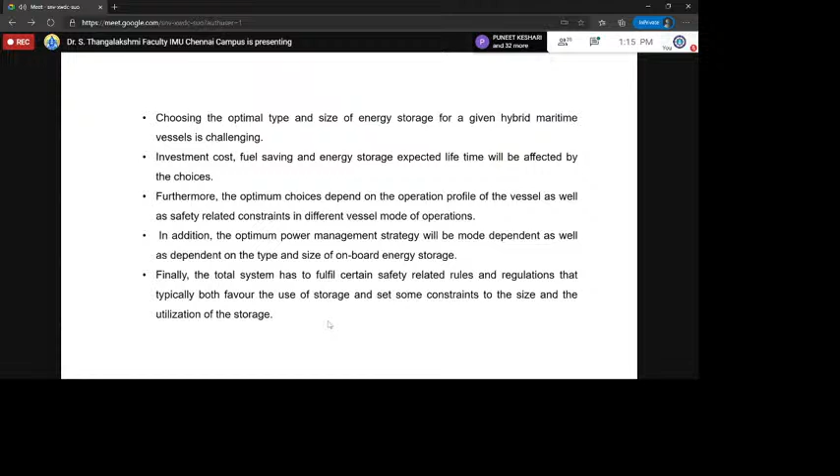There is another researcher working on unmanned underwater vehicles, UUV, which is widely used for survey and mining of natural resources, especially available underwater and on the seabed. Underwater, vision and depth perception will be poor. Thus, navigating and maneuvering a remotely operated vehicle, ROV, will not be very easy. Usually the power connection will be tangled and there will be frequent disconnection. So in order to ensure power, we have to rely on an energy storage system.

So in the event of an ROV losing power from its connecting wires, or an autonomous underwater vehicle, AUV, power failure, an emergency power system will be needed to power the critical equipment. At least some critical equipment of the ROV must be powered, so we need to have an energy storage system. This author is projecting how important the energy storage system is in the case of UUV, and he has proposed an emergency power system using a lithium iron phosphate battery stack power system.

And he has analyzed the battery management system, and the efficiency is weighed based on the SOC estimation. There is one other author talking about hybrid power which is used for vessels, like how fuel cell is parallelly used with lithium battery, then how the cost and the energy is being governed.

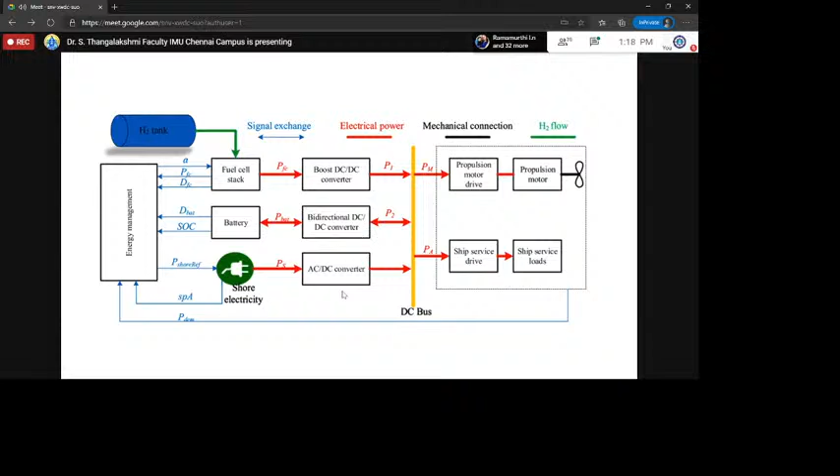So the fuel cell is generally coupled with the hybrid energy storage system in order to improve the dynamic performance of the system. Therefore, the sizing of this hybrid energy storage and the design of energy management system is very, very important, and it is the present research area.

So he has used a support vector model for frequency control, and he has proposed this EMS based on this frequency control. And he is keen on the sizing of this HESS, and he has proposed a mathematical model, and through his experiment, this kind of system is quite promising.

And this is the typical EMS structure for the fuel cell and ESS, energy storage hybrid power system. There are two different controls he has taken. He is using a support vector model here. One is the high level control, which comprises of the energy management system, SOC management, power allocation, and equipment protection. The low level control takes care of droop control.

It is separately for fuel cell and ESS, and it will be connected here simultaneously, so that by the algorithm what the author has suggested, you could perform both high level and low level control.

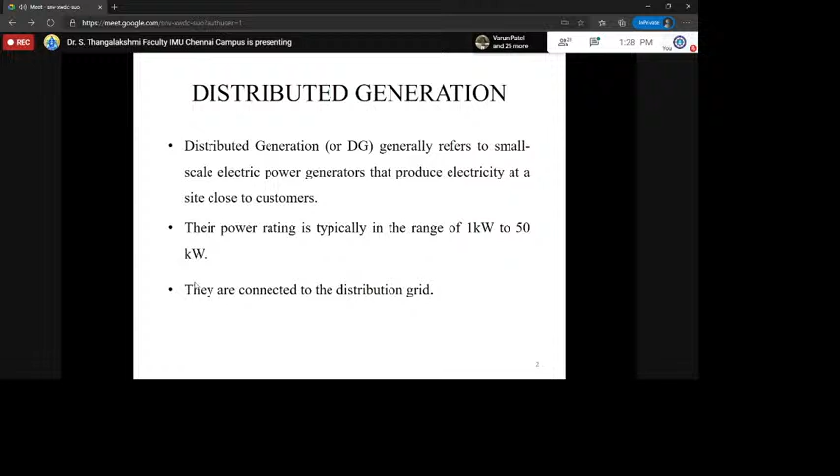This is about optimizing the size and allocation for distributed generation with immune algorithm. Distributed generation generally refers to small-scale electric power generators that produce electricity at a site close to consumers. In some cases, it is very tedious to connect the power and substation through the normal transmission line, so such places also we are relying on distributed generation. Their power rating will be ranging from 1 kilowatt to 50 kilowatts. They will be usually connected to the distribution grid. The objective of this paper is to identify the actual location and size of DG units using immune algorithm and to improve the voltage profile along with reduction in power losses in a balanced radial distribution system.

When we are talking about distributed generation, it may be a solar power cell or a wind power, or it may be a hybrid of both, or any other generator generating power of minimum capacity which could serve a local community. Actually, the grid will be there and their voltage will be normalized. When we are feeding a DG suddenly into the grid, it will definitely create some fluctuation, especially when we are talking about the line, voltage stability is very, very important. So when we are suddenly adding or removing something from the line, it will definitely affect the voltage stability. So while connecting the DGs to the line for serving the community, we have to be careful enough that the voltage stability is not affected.

So the main aim of this paper is to improve the voltage profile. There are many methods given in literature for improving the voltage profile, especially for DG platform. Along with power reduction, we are giving a new proposal using immune algorithm, meaning the time of settlement will be very minimum and the power losses are not much with the suggested algorithm. So these are the objectives. With this objective, let me proceed.

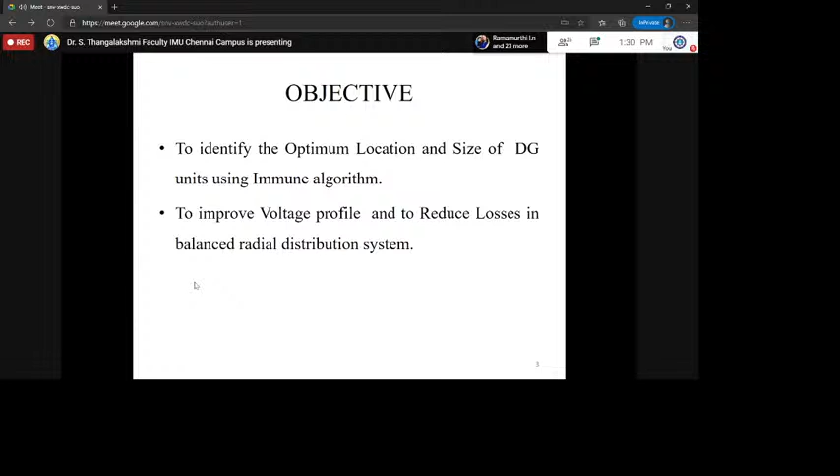So I am just taking an IEEE 34 bus radial distribution system. Usually we will be going for a radial system and radial interconnected system. This is just for testing purpose, so I am just taking a standard IEEE 34 bus radial distribution system. In order to have a visualization to the audience, I'm just showing this figure. This is not the one what we have used for our experimentation or simulation.

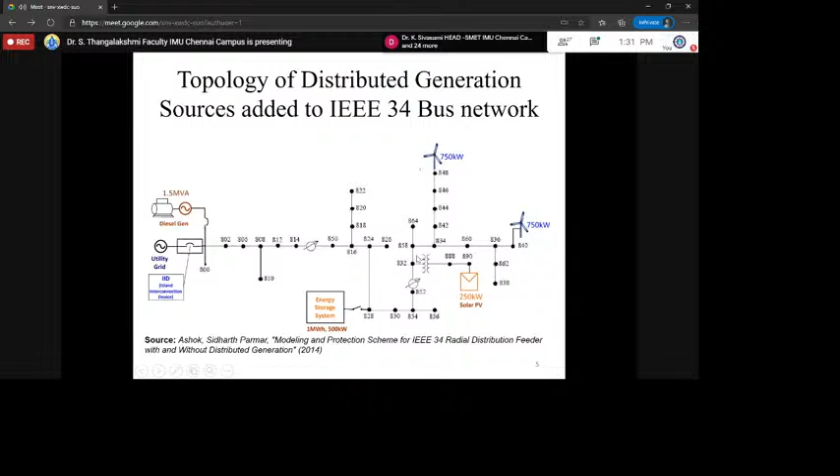See that you have two different wind generators, each generating 750 kilowatts, and you have a solar cell with a 250 kilowatts capacity, and there is an energy storage system here again, and you have an island interconnection device here, and here you have a normal diesel generator set. So this is a typical topology of a distributed generation source added to an IEEE 34 bus network. Actually, we have labeled from 1 to 34, but in this they have different labels. So this is to show how it will be looking, right? This we are not taking for experimentation. Our system of consideration will be having 34 buses, one source, and there are 33 loads.

The rating of the load, the real power load is 1568 kilowatts and 743 kVAR is the reactive power load. And the source is capable of generating at 69 kilovolts.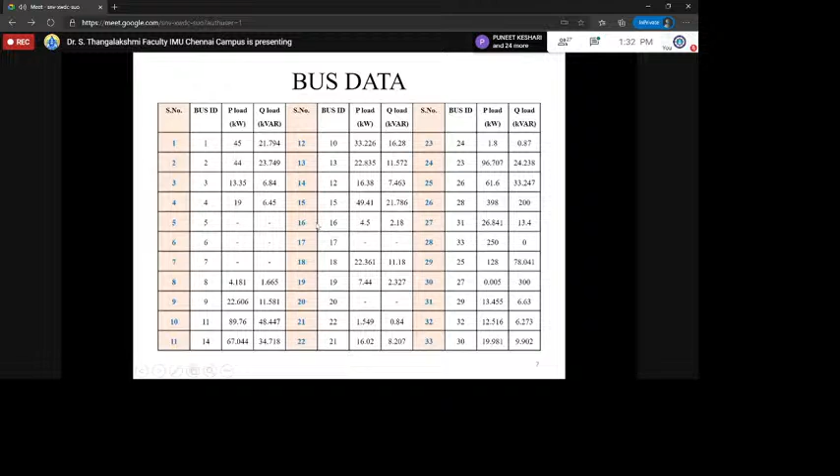The bus data we are taking for this system is from the available literature. There are 33 buses, and the load configuration with reference to each bus is displayed here. This will be given as input while writing the coding. There is also line data, since between two buses there will be a distribution line, and the characteristics of the line, given by resistance and reactance, are shown here.

Let us now talk about the immune algorithm. This is another new population-based optimization method, and there are many such algorithms available. Already genetic algorithm is in place. Artificial bee colony algorithm is one such algorithm, and we have ant colony algorithm also. There are many heuristic algorithms available.

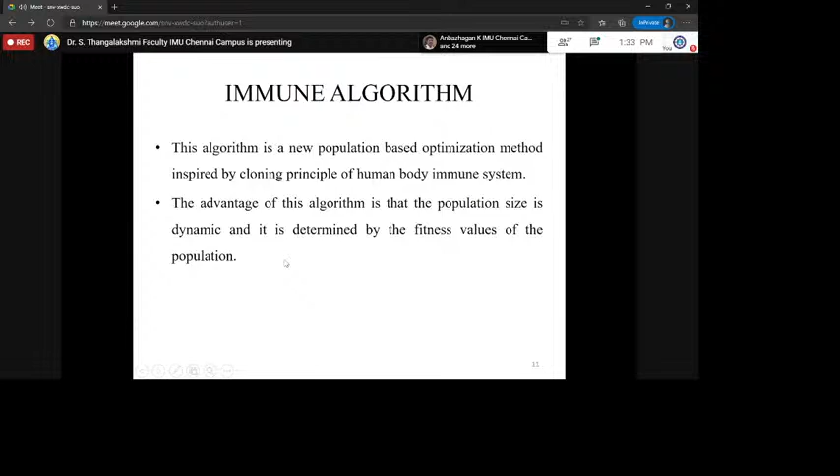We are proposing an immune algorithm. It is inspired by cloning the principle of the human body's immune system. The advantage of this algorithm is that the population size keeps on changing, meaning it is dynamic, and it is determined by the fitness values of the population. So this is the flow chart of the immune algorithm.

The criteria will be whether the required voltage has been reached, whether the voltage is within the limit, or the power loss is within the limit. After checking those criteria, if the criteria is met, then the program is stopped. That is, the number of iterations is over and we have already found which kind of DG or which place it has to be added. Otherwise, we are again looping into the same steps.

Let us now describe the flowchart. In input antigen coding, the input data are seen as antigens that include representations of the objective, which is to maintain voltage stability. Of course, the constraints will be the minimum and maximum per unit voltage, and likewise the maximum power loss.

In the second step, the initialization of antibody formulation, a random number generator was applied to generate antibodies on a feasible space. In order to have better or superior convergence, we are producing a few new antibodies, and this is continued in each generation. Each antibody will consist of the number of a particular bus in which DG is to be installed.

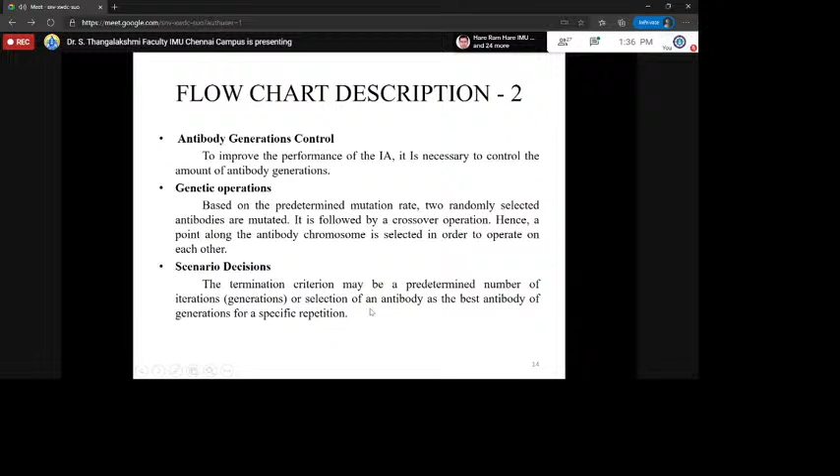The methodology can be well explained through this. We are taking the IEEE 34 bus radial distribution system. We are partitioning based on the availability of DGs, and we can go for a different combination based on the available DGs again. For this experiment, we are partitioning into three: partition 1, partition 2, and partition 3. Each partition, along with the immune algorithm, will be finding its best output.

Each will be giving its best. So you have 3 best values with the minimum power loss, and they are combined together. Here we are finding which is the best of the best. The minimum among all local best values will be selected as a global best.

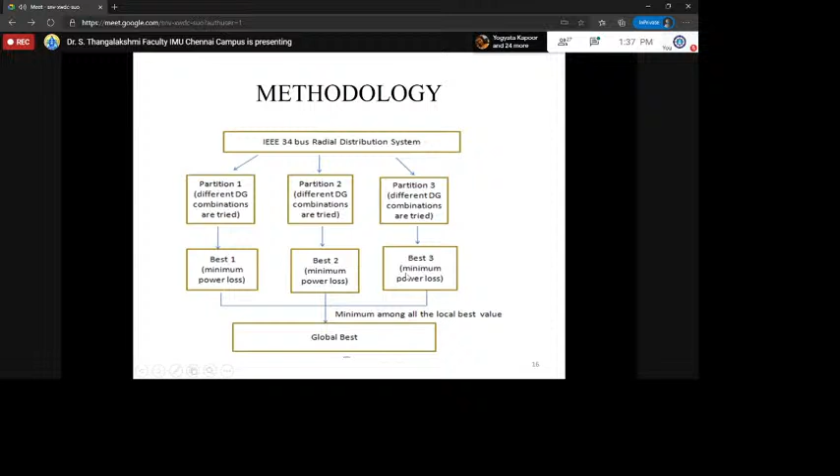So in this portion, we are actually mimicking the genetic algorithm process. The criteria for partition is how we are actually partitioning the available group. Depending upon the increment or decrement of power loss, which is the major concern here, we move across the network, and each bus will be represented with a label positive or negative. 0 is there, and 0 is having no impact. Plus is assigned for power loss increment.

Suppose if I am moving from bus 1 to bus 2, say for example, bus 1 will be giving some power loss. When we are moving to the other line, the power loss might have increased or decreased with reference to the previous bus. So if there is a power loss increment, I am assigning a positive label. If not, if it is reduced, I am assigning a negative label. If they are both the same, I am giving a 0 label. So if the loss difference at bus i is greater than at bus i minus 1, a positive sign will be assigned. Otherwise, a negative sign will be assigned.

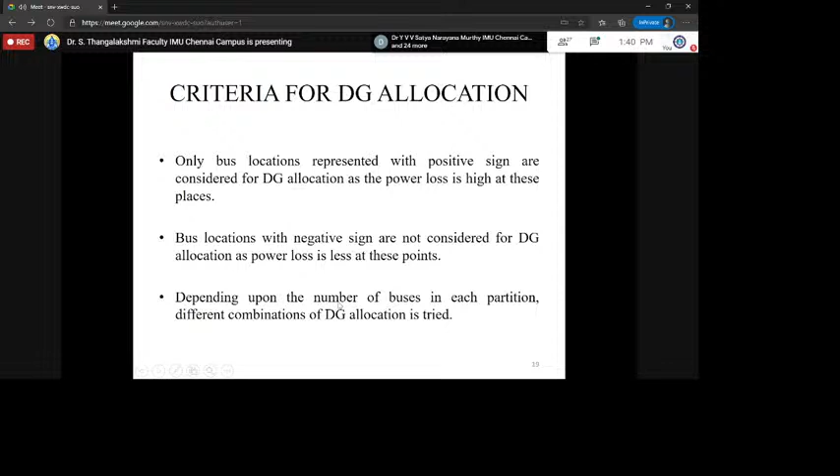So we have to supplement the power with the available DG. So we are allocating DG wherein we have the positive sign. And bus locations with a negative sign will not be considered for DG allocation because the power loss is already less at these points. Depending upon the number of buses in each partition, different combinations of DG allocation are tried. Say for example, here you have 3 buses, here you have 4, here again you have 4. So depending upon the number of buses at one set, we can go for a different combination of DG allocation.

As far as size is concerned, we do have some available sizes. Because it is just a simulation study, we had taken only 700 kilowatts and 100 kilowatts, and with reference to MATLAB, we have chosen the best size. With reference to bus number 33, MATLAB suggested 700 kilowatts of size totally with the available DG combination, and with reference to bus number 30, wherein we are going to insert DG, it suggested to go for 100 kilowatt size. All other results we have carried out with ETAP.

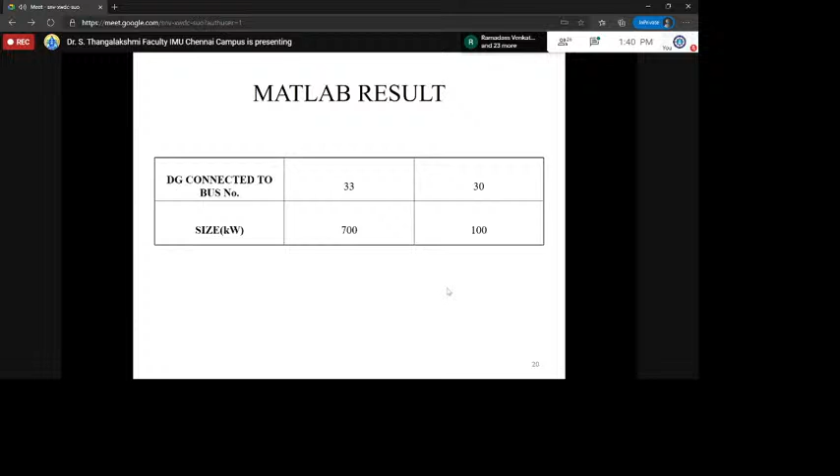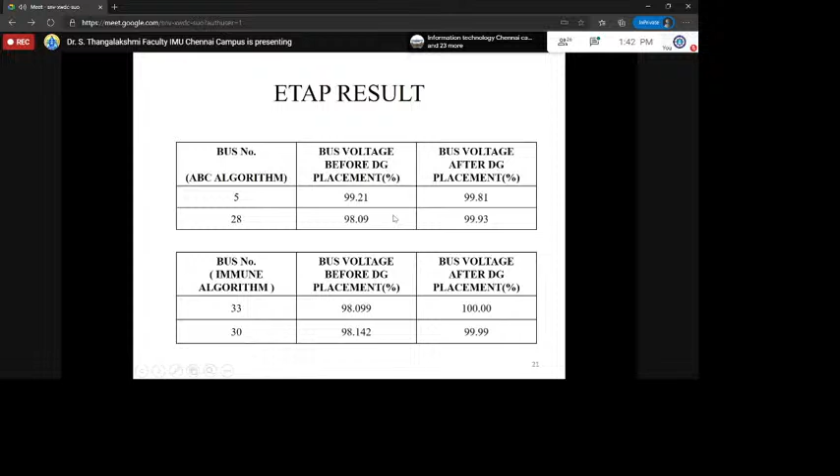We have the stabilized voltage after DG placement suggested by the proposed algorithm. Voltage stability alone is not the objective, but we have considered power losses also. So with reference to the ABC algorithm and immune algorithm suggested buses, we have calculated the power losses before and after DG placement, and both algorithms showed a percentage decrease in power losses.

So for all buses, the voltage profile is given. The green color indicates the bus suggested by ABC, at which we have to insert DG, while the immune algorithm suggestions are given in purple color.

See that before placement of DG, it was 99.21 by ABC, and after placement by ABC, it is 99.81. So though it is not suggested by the immune algorithm, if we use the immune algorithm, the voltage profile has been improved even for this bus. Likewise for bus number 28.

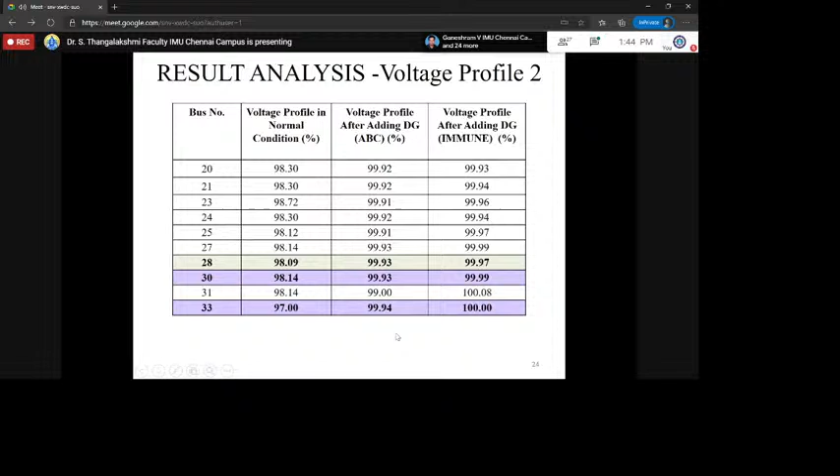You could see that at buses 30 and 33, the voltage level was very low. In fact, the bus at which the voltage was very low is only bus number 33. It was not selected by the ABC algorithm, but our proposed algorithm selected that also. And you could see that uniformly the voltage is almost 99.9%. Because it's a simulation, we could reach this level, but in practice it may be lesser than this. Still, we could improve the voltage profile with this algorithm.

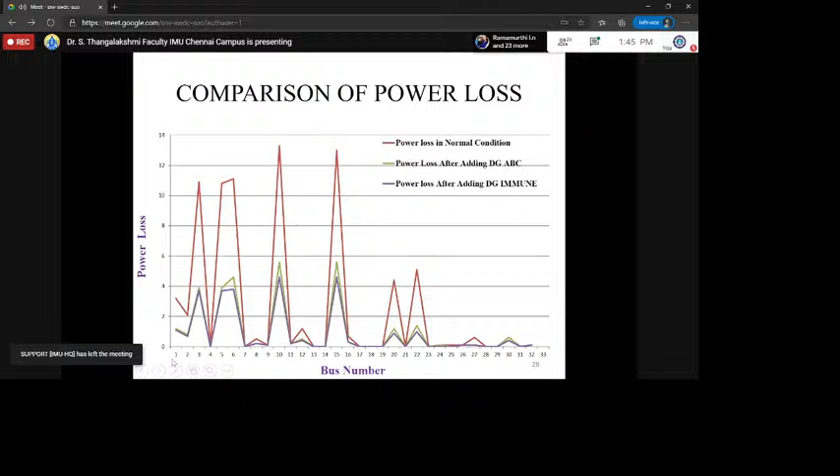Likewise for power loss, we have gone through the power loss with both ABC and immune algorithms, and the comparison of power loss graphically is projected here. Even from this graph, you could see that the power loss after adding DG, which was suggested by the proposed algorithm, is very less.

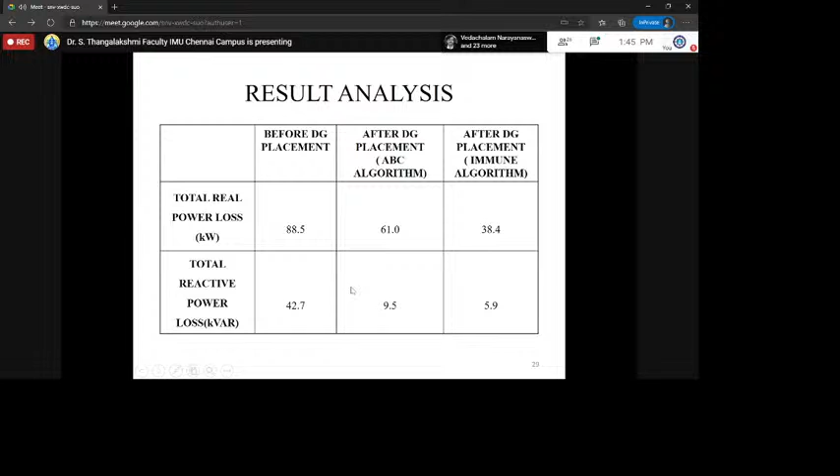So this result analysis has already been deliberated. The real power loss before placement, the total real power loss will be 88.5. After DG placement, it is only 38.4. With the existing algorithm, we can analyze the same, but it is more than what we are suggesting, right? This is again a simulation result, so the real figures may vary.

As a conclusion, the DG is placed in the power distribution system using the immune algorithm as per our objective, that is, the voltage profile of the system is improved. Also, the real power losses are reduced, and these results are verified using ETAP software.

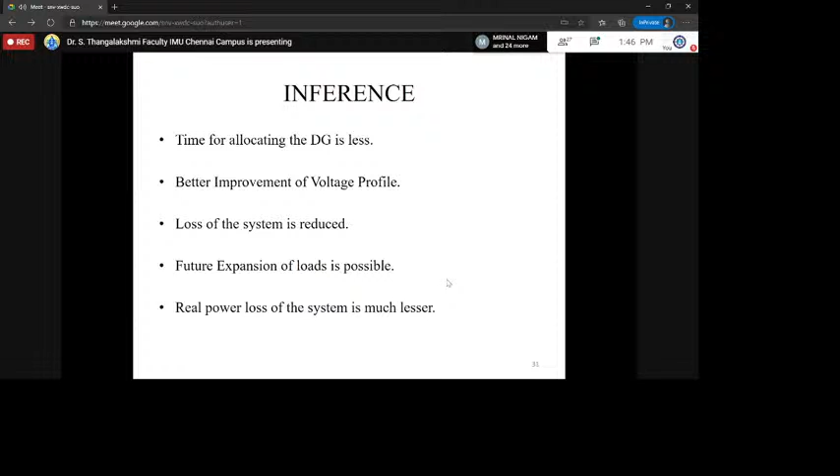What I could suggest to the audience is that though it is a pure electrical paper, it is about adding DG and how it is going to create a transient stability problem on the existing distribution grid. Instead of a grid, we will be having a marine power distribution system. There also we are having many kinds of DG systems in order to achieve clean energy. So in such a case, we can place the DG at an appropriate level and size, which could give better performance for the vessel. That's all is my inference.

Thank you very much, sir. So it's a very good presentation, madam.

Thank you. So basically what I see is that it is a kind of heuristic algorithm. Yes, sir, something like a bee colony optimization algorithm.

So the one thing I want to know from you is, can it be seen in a kind of smart grid? Can we see this in this way? Yes, sir. Yes, sir. Yes.

So in such a case, in future ship power systems are looking forward to adopting the microgrid concept. In that way, whether microgrids also can be considered as a node for this? Yes, sir, definitely. Irrespective of the capability of the microgrid to deliver, we can program it, right?

Okay, so another thing is that what are all the inputs, for example, if the hardware system is implemented? What are the inputs? Is only the voltage input enough, or what all inputs are needed?

No, sir. All the load requirements we have to feed initially - all the load requirements, bus data, all data has to be fed. It's like a software, it will do this within a few seconds and we get the result. Before designing, we could analyze what would be the case and where it can actually be located. That is what is of major concern.

Where we can locate this DG and what size it has to be - mainly during transient disturbances. And as I said, this algorithm is dynamic in nature, so automatically it would be changing. If the load conditions are changing, automatically it will be changing.